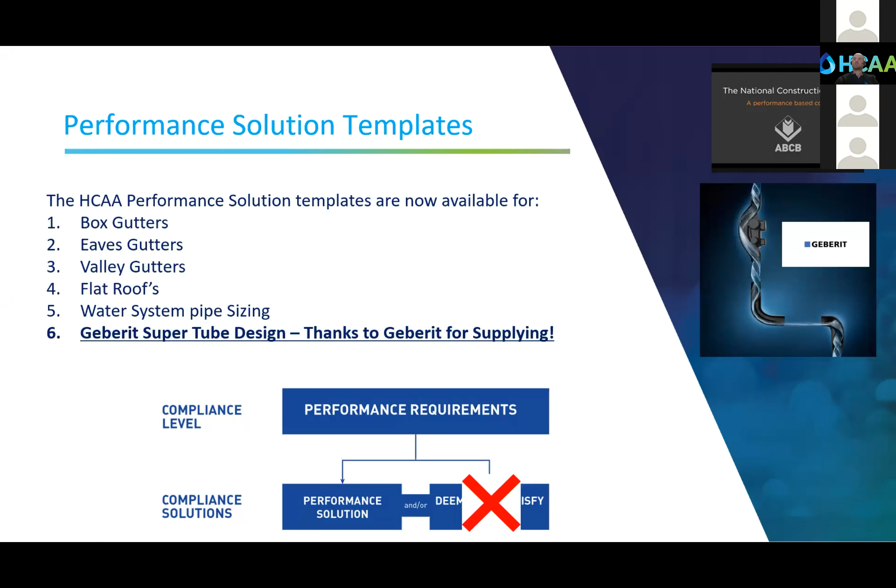The hydraulic diploma is starting online this month, or supposed to. Because of COVID there's possible delays, but Rod Ware will update us all a bit more on that.

I was going to say, can I jump in and add something to that? Do you want to do it now or later with the cadet stuff? No, you can do it quickly now.

I've literally just got off the phone with TAFE about half an hour ago. It's a bit of a moving goalpost, this one. What's happened is the diploma itself won't be starting this semester. TAFE have been trying very hard to get that happening, but the majority of people who've shown interest in doing the diploma aren't actually qualified, so they need to complete a couple of units to be able to enrol.

So TAFE are going to enrol everybody in the design, or hydraulic design stream, Cert 4. Anyone who has done their operation stream after their trade will get credits for the subjects they've done, and they'll likely only have probably 2 or 3 units to go. In term 3 the plan is to get all those people sorted out, and then by term 4 this year the diploma subjects will kick off.

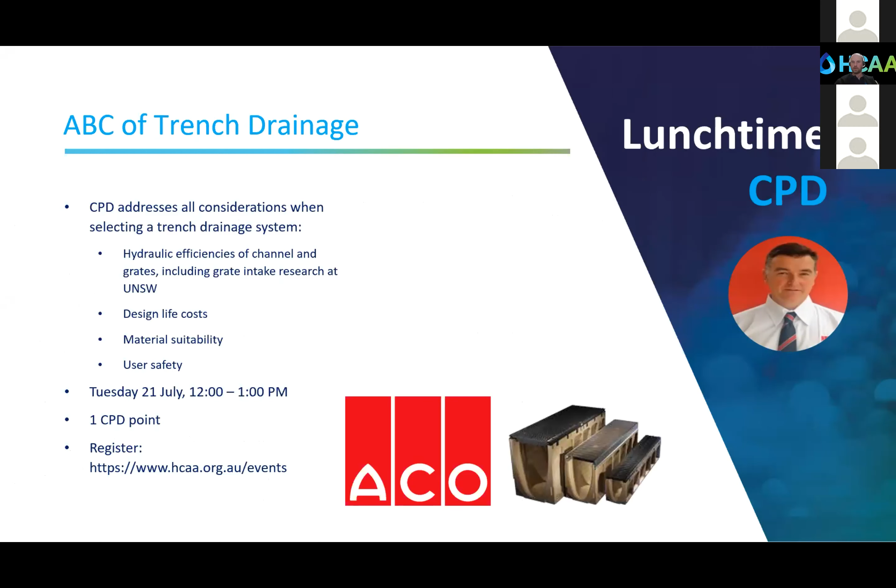Okay, so this is a new document that came out last week. We did send an email out, but it's a discussion paper, it's not set in stone. I don't think, if this does happen, that... this is at a national level, they've got to deal with all of the states. I think this has been discussed a few times over the last 20 years, but I do think they've got much more chance of getting it through now than they have previously.

But the main thing for us in our hydraulic world is the proposal states there's 3 levels of qualified individuals within hydraulics. Degree qualified, they're saying, if you read the paperwork that we sent through, a degree qualified civil engineer - they don't talk about any other disciplines, just civil engineering. And I think it might say, it does say in there, civil, hydraulic or water services, which they don't exist anyway.

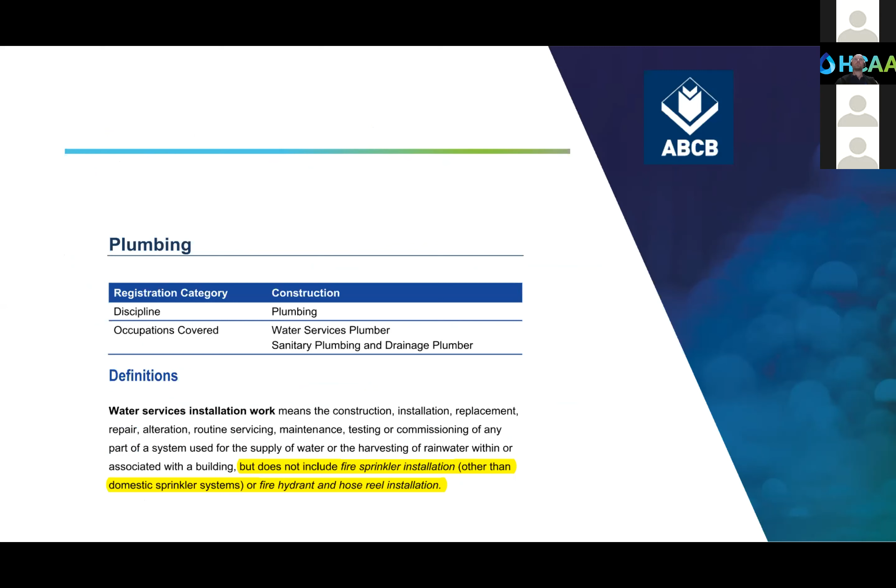There's one more screenshot here. This is just for those of you who have friends that are plumbers. I sent this to the master plumbers in Queensland, New South Wales, ACT, and Tasmania this morning as well. Basically, the document proposes that plumbers cannot install hydrants and hose reels. You can see at the bottom of the page there, which I believe in the majority of states around Australia, plumbers do install hydrants and hose reels. So that's some feedback. I think the master plumbers should get behind this as well.

I can pause there if anyone wants to jump in and throw any questions in or suggestions now. We can have a quick 2 or 3 minute chat around this, or otherwise I'll move to the next slide.

Nothing? Okay. Nick wanted to ask - Leon from Master Plumbers wants to ask a question. Is that going to get attended to later, or no, he can. Yeah, go ahead, Leon can ask a question. You there? I can't hear you. Oh yeah, oh, we go. Got you. Hey, Leon. Hey mate.

Just a quick question - does the BPB accreditation, is that the equivalent of a degree in terms of? Yes, exactly right. With the BPB, which I'm going to get to shortly, they've been dissolved, and as of the 1st of July they're now Fair Trading. So the same group that registers builders, plumbers and electricians are now registering engineers as well, or engineers and consultants. But yeah, you're correct. So to be qualified under the New South Wales scheme, you have to have a diploma as your minimum qualification.

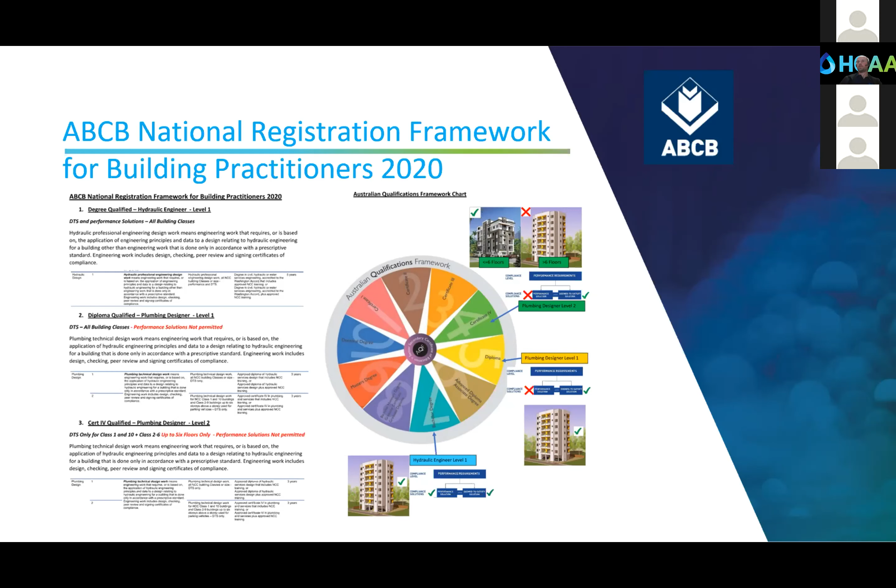Okay, so next was our warning, I mean there could be people from Perth practicing in New South Wales as well, but this is all these changes in New South Wales law. A few of the guys from Adelaide dialed into the committee meeting last week, so I apologise if I bore you with this again. So fire practitioners in New South Wales, as of the 1st of July 2020, practitioners must be accredited.

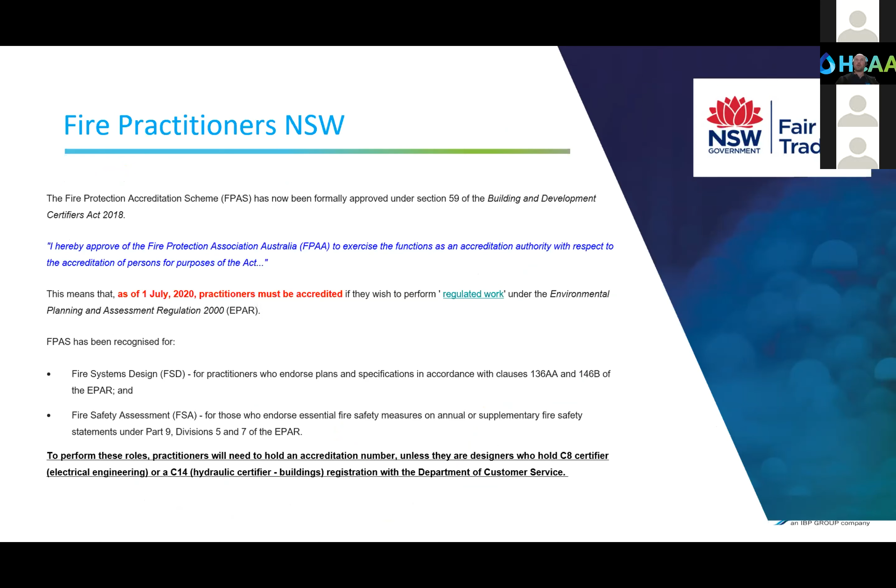So you can no longer design wet or dry fire systems in New South Wales without being appropriately accredited. How do you get accredited? I'll get to that shortly.

So on this particular slide here, maybe I'll look down here, so I'm looking at you all. The Building Professionals Board have now been disbanded, and they are now Fair Trading. What we were referring to as a C14 hydraulic certifier has now just been called a certifier hydraulic building.

They're actually all the same staff. They're in the same building in Parramatta. They're just all wearing different shirts now. So not much has changed other than the name in reality.

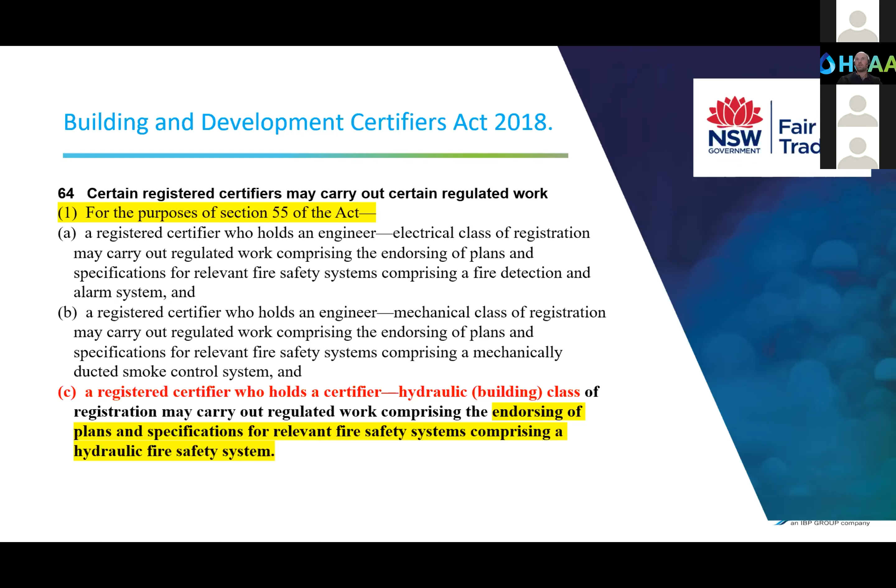So this is part of the Act. There's a few different acts, which I'll get to in a second, but under Section 55 of the Act, a registered certifier who holds a certifier hydraulic building class of registration may carry out regulated work comprising the endorsing of plans and specifications. So how that works is over here.

You can see there's the Environmental Planning and Assessment Regulation 2000. That calls up this legislation in regard to fire practitioners. The word competent fire safety practitioner has been used for about 4 years, but that's now being renamed to a fire practitioner. So again, that language will still hang around for a while, but that's the new wording.

You do a short course, you do an assessment, you provide your insurance, and that current renewal is $1,750 a year to renew your accreditation with the FPAA. With the New South Wales government or Fair Trading, you must have a diploma as a minimum, you must have 3 years experience, and you have to do a 4-day certification short course with the University of Technology in Sydney. They're the only uni that run the course.

That course is $3,000. You have to do 3 assignments and sit a test - it's kind of like going back to school again. Then the annual renewal with the government is $750 a year, and you carry 10 years professional indemnity for design. So if you change companies or the company you work for goes bust, you have to carry PI for 10 years for any jobs you signed off on as a hydraulic certifier. It's pretty scary stuff.

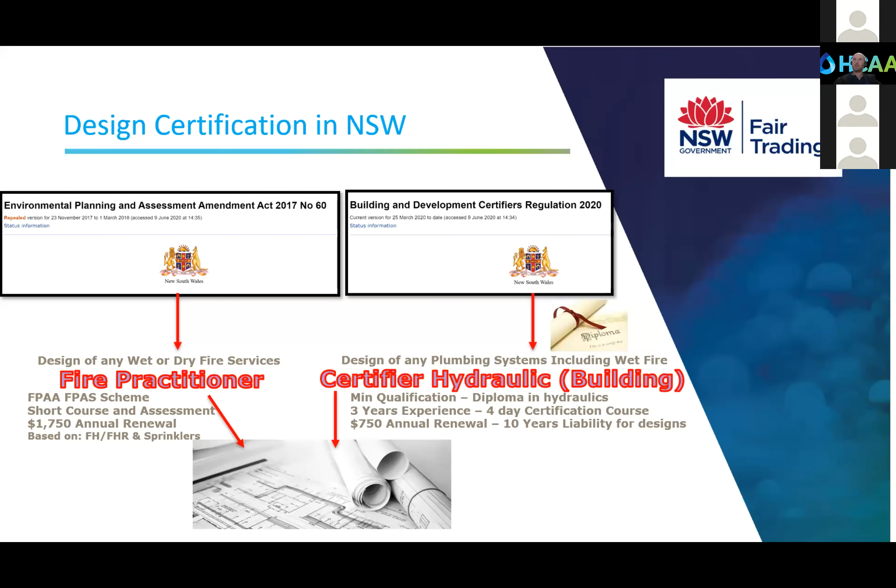This is how it works: most of our members are going to be accredited over here under Fair Trading, and being accredited here allows you to sign off as a fire practitioner. But some of our members will be accredited under FPAS - that's their little logo for FPAS. That's how our members become fire practitioners to do hydrant or sprinkler design in New South Wales. Some of our members do dry fire designs as well.

The only way to be accredited for dry fire - smoke detectors - is to be a degree-qualified electrical engineer. So unlike the hydraulic guys, anyone who's done a fire diploma instead of a degree cannot become registered to sign off on dry fire under this building and development certifiers regulation. What really needs to happen is the government needs to be lobbied to provide a separate pathway for guys with a fire diploma. At the moment, if you've got a fire diploma, the only pathway to sign off on dry fire is under FPAS. I apologize if I'm boring people that aren't practicing in New South Wales, but there are some pretty significant changes.

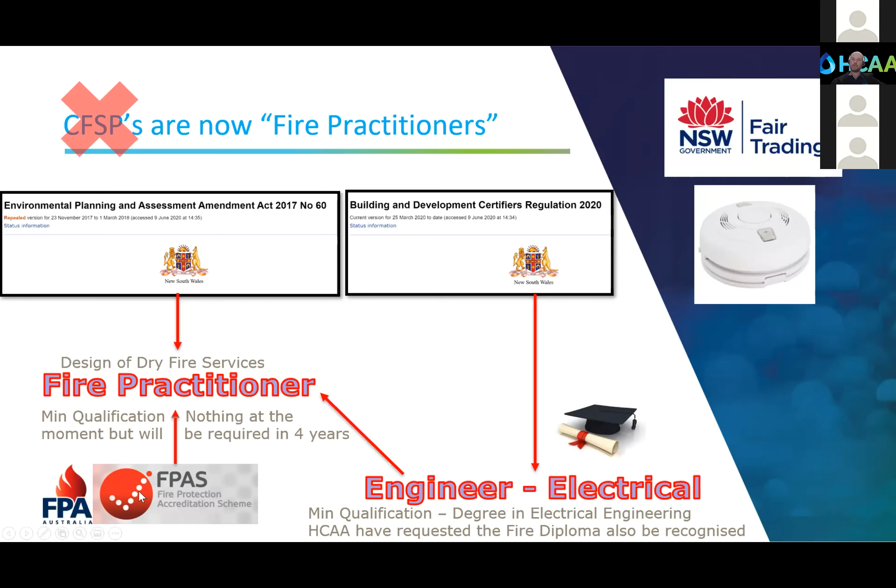Within the company I work for, ACOR, we've got 400 staff Australia-wide, and we currently have no one who can sign off - I'll have the slide coming out later. We've got no one that can sign off because, although I am accredited under the government scheme, our insurance policy was rejected - our insurer is excluding non-compliant products. They're very strict about insurance policies, and we cannot find an insurer at the moment willing to give us a policy that meets the New South Wales government's requirements. So we're currently in negotiations with a few fire contractors who've been accredited under FPAS to sign off on our designs. That's how mad the legislation in New South Wales has gone.

This one was a bit of a warning. This could be happening in other states, but I've only been advised of this happening in New South Wales. Fire and Rescue New South Wales - this was a job that I worked on.

They did an inspection. We showed the hydrant in the corner here, but the plumbers installed it within probably 300 mil of the door. The fire brigade said that because the hose connection is within 1 meter of the door, that's a non-compliant installation, and they requested the plumber move it back into the corner, which the plumber has now done, and they've ticked off on it. You can see in the corner you would get the meter's clearance. But if you read the black and white interpretation in AS 2419, it doesn't call up a meter's clearance to a door. So it's one of those gray areas within a standard - just be aware that this is how the fire brigade are interpreting it.

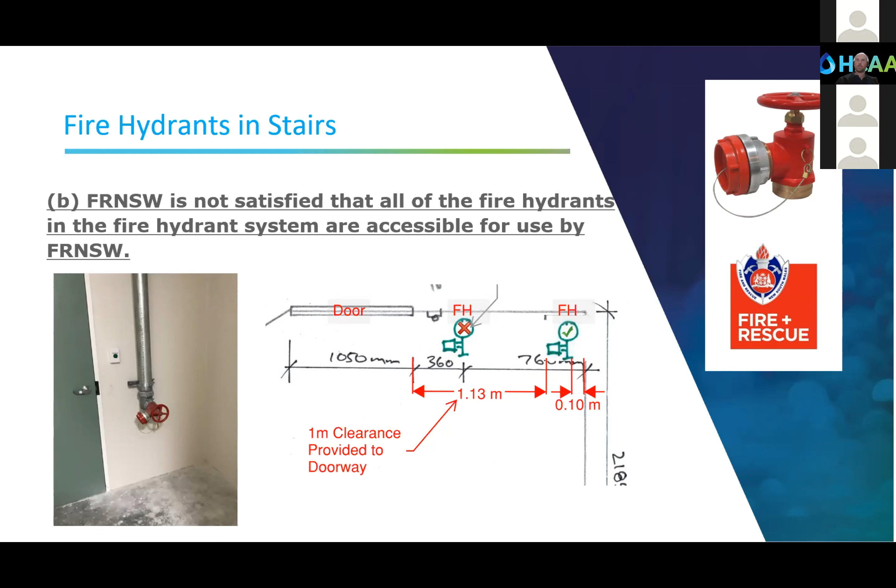When they turn up at the end of the job, they do have the authority to stop - in New South Wales at least - the authority to stop the job from proceeding. So that's what the AS 2419 shows: a meter's clearance to a doorway.

Yeah, but you can interpret it as you like. And then this was another job, which is a contradictory assessment.

One of our members defected the plumber because the hydrant was facing down the stair instead of towards the door. The accredited certifier on the job, the A1 building certifier, which in New South Wales signs off on the whole building, backed the plumber on having that facing down the stair, which is a slightly separate issue to the one I just showed you before.

But again, there's differences of opinion here that the code doesn't clearly spell out. To me, having it face towards the door would make more sense. There's more than a meter's clearance in that installation, but again, just some different opinions out there in the industry.

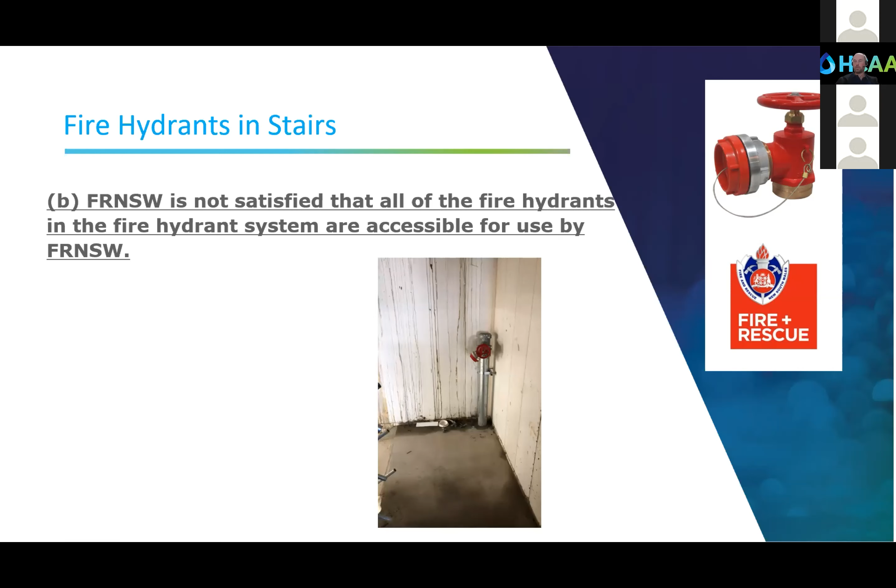I don't know if this email has actually been sent yet. I did do a draft of it the other day, but all 5 versions of AS 3500, or AS/NZS 3500, have been sent out in draft format for comment. All comments can be submitted to inquiries at hcaa.org.au.

The documents, as I'm aware, what Standards have done this time to help people out is they've given 2 versions: a clean cut version, and then a version which has edits in it so you can clearly see what has changed. I'm not aware of anything particularly controversial in there, but if you guys have any comments, send them through to us and we can present them to Standards Australia.

The latest gas code should be coming out for comment in the next month or so, so keep your eyes out for that. There are some relatively big changes in there that I'm hoping to present maybe as a separate meeting to members to run through those changes.

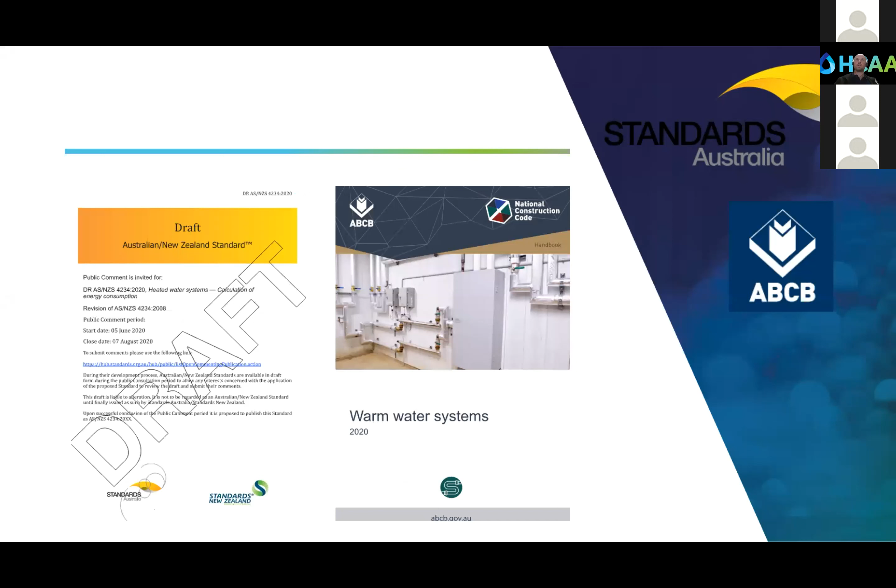There's a couple of other draft documents coming out at the moment. We've got one here on heated water systems, calculation of energy consumption, and then the ABCB have produced one on warm water systems, again both coming out in draft format. If anyone's keen to have a look at those documents, let us know. It's still yet to be seen how those documents are going to be referenced or used, but it's just a bit of a heads up that they're coming.

So this was the insurance policy bit that I told you about. Again, if you want to register yourselves in New South Wales - non-compliant, non-conforming, I won't run through all that - but what I was told is a non-compliant product is what our insurer is currently excluding. An example I was given was a Colorbond roof sheet being used on a wall: if it's designed to be used as a roof sheet and installed horizontally, it can't be installed vertically. I don't know if that's true or not, but what the insurer is saying is they won't insure you for a product that hasn't been installed as per its design intent.

Where the New South Wales government is saying, well, the only thing they'll accept excluding at the moment is cladding, which is obviously in relation to the fire issues that have been happening with non-compliant cladding.

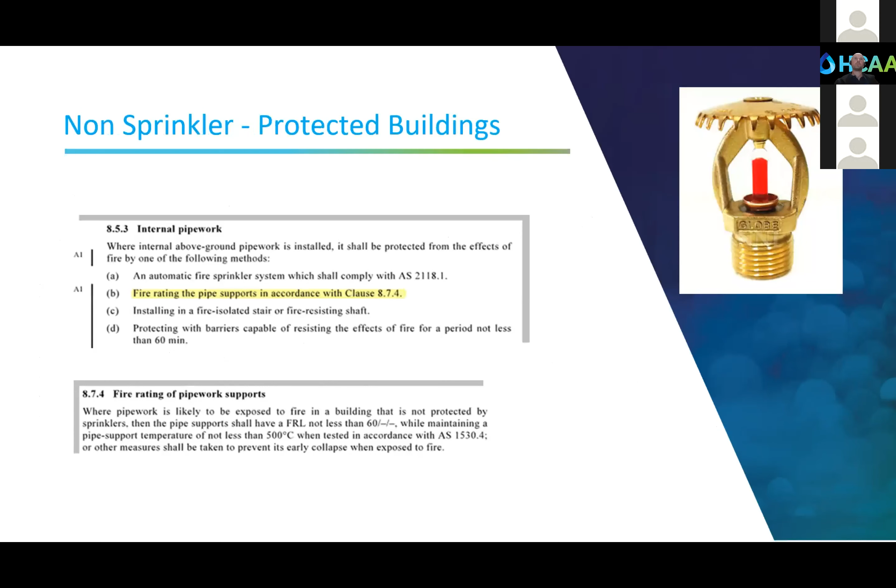Non-sprinkler protected buildings - I left this in from the last meeting, but what I was going to say is, if you are going to use this bracket from Protector Pipe, you will need to consult your fire engineer on your job as well, because I don't know that it's strictly in compliance with 2419. Someone just raised this after the last meeting. Your fire engineer can easily reference that as a solution instead of having to use the vermiculite spray in option 2 there over the brackets, which also has to be signed off at the end of the job anyway.

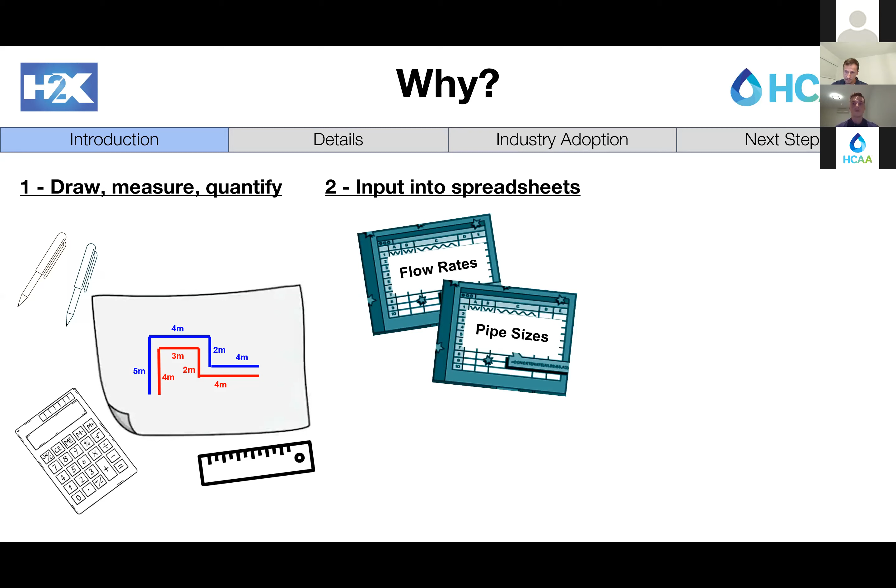Next, we'd manually transfer the information into a spreadsheet, and it's commonly not just one spreadsheet. We'd typically have a spreadsheet for flow rates, pipe sizes, pressure loss, and hot water return, and potentially some others too. Then finally, we need to transfer the results manually back onto the design.

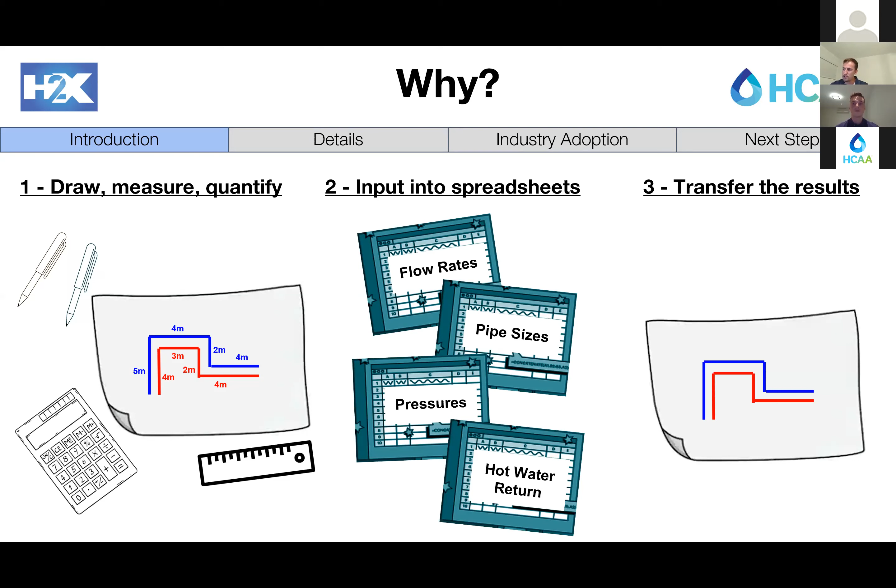So the most obvious observation with that process is it's time consuming. It's also very tedious, and not only that, there's a significant risk of human error, as there's a lot of information being manually transferred to and from spreadsheets. It's also very difficult to review, with the calculation results being in a separate location to the drawing the results are shown on. And inevitably, the architect's going to redesign the building, which can be problematic.

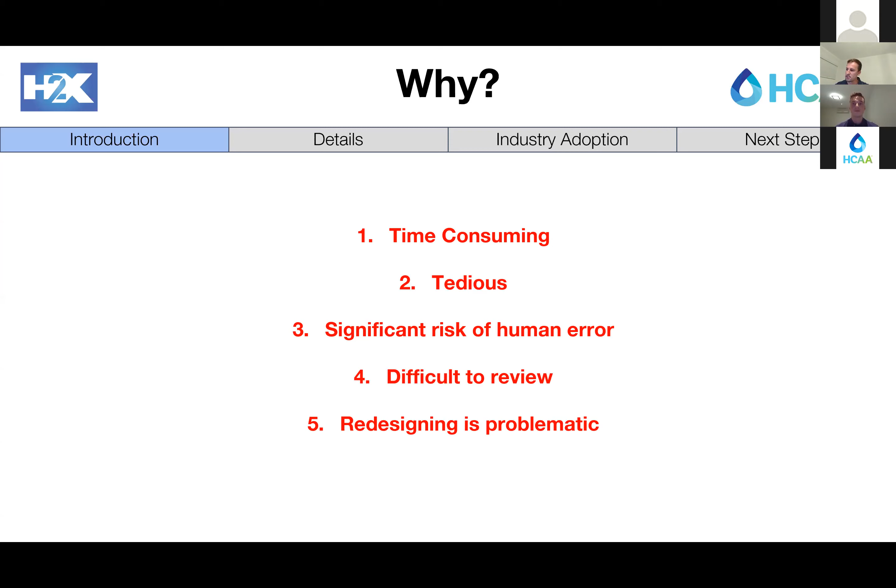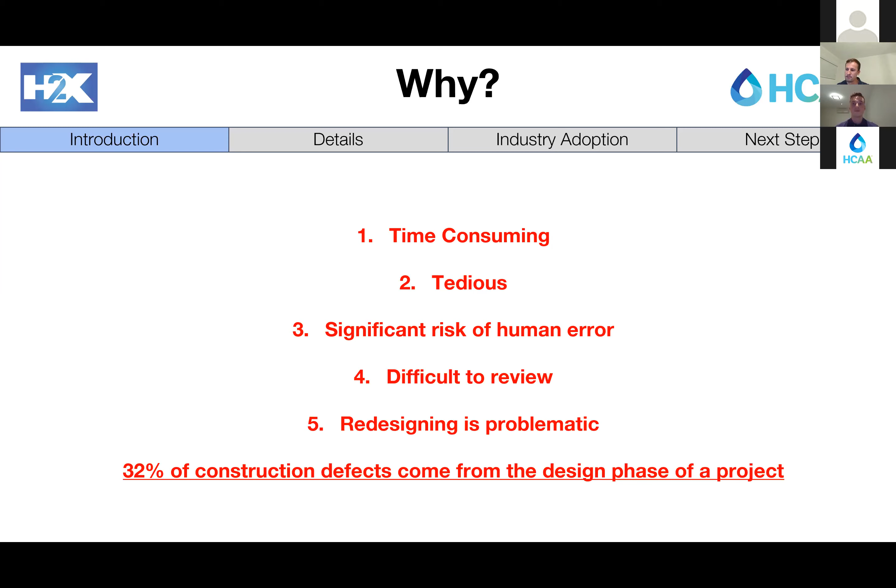It wastes a lot of our time. I think we're all familiar with it. Usually results in us needing to just redo the calculations and start from the beginning. And quite a surprising stat is that almost a third of construction defects come from the design phase of a project. Upon reading more about it, it's pretty much those 5 points listed above that contribute to these defects. It's not thought to be a lack of competence by the engineer, but just more of the processes.

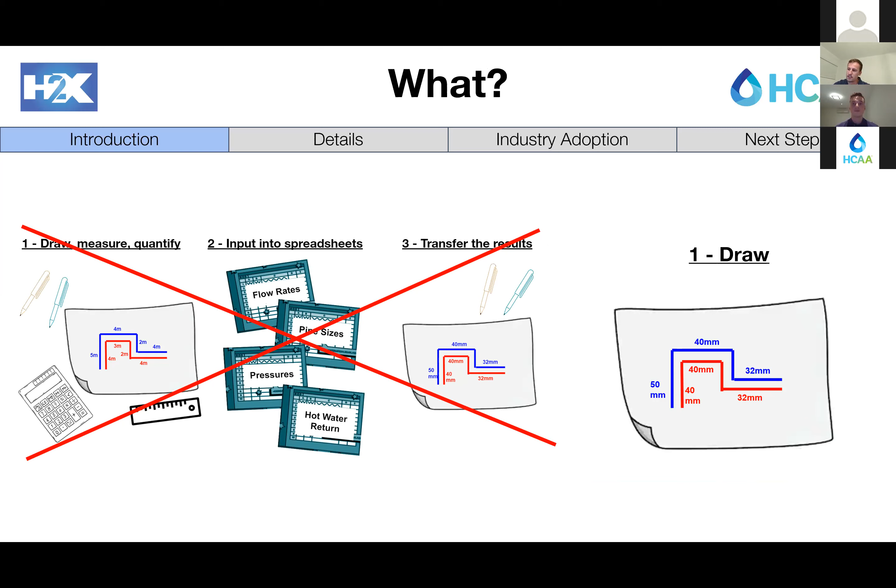So what does H2X do about this? Put simply, it replaces the traditional design and calculation process we just spoke through with just one simple step. You draw out the system and calculations are automated, meaning the results are provided instantly to your design.

The last piece of the introduction is, how does it do that? The answer is parameters and properties. For example, when you draw a pipe using Bluebeam, you'd be familiar with selecting parameters such as the thickness and color of the line or pipe. Whereas in H2X, it's a bit more technical, so you'd select parameters such as the maximum velocity and the material. Then when you go to connect to a fixture, that has properties like loading units, minimum pressures, and maximum pressures.

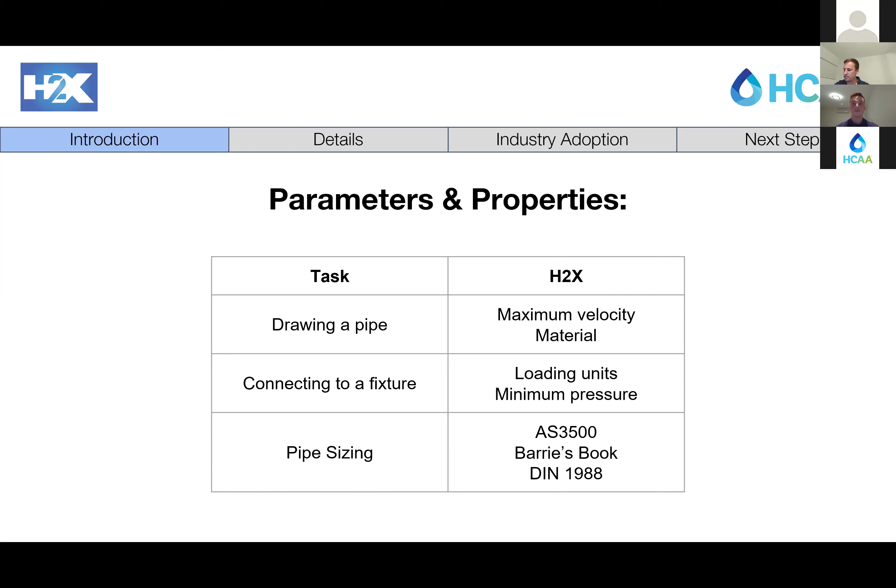And then when it comes to flow rate and pipe sizing, again there's just another parameter, whether it's the Australian standards, Barrie's book, the DIN, or one of the other international standards we have. I'll just go through the process diagrammatically.

It starts with the drawing being to scale, so when the user draws a pipe, the length is automatically measured. That then means when the fixtures are connected to the pipes, the flow rates are updated instantly. We'll see it again here as we connect another fixture.

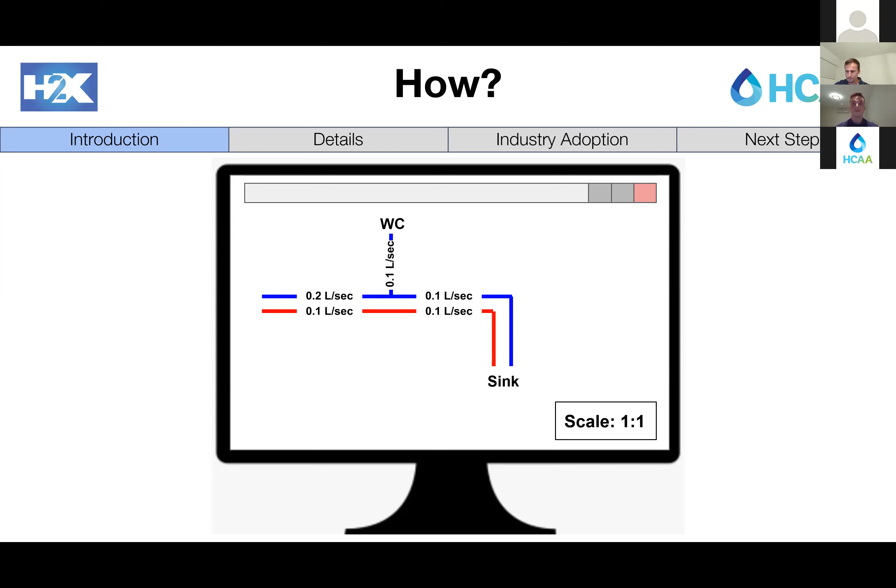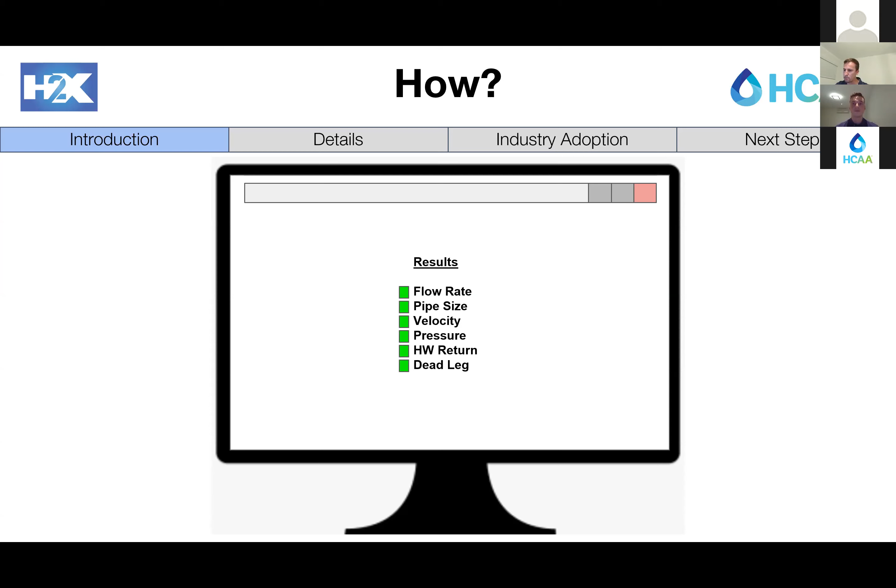I think the beauty of it is that once we know what the flow rate is, it allows us to size the pipes, which is based on a maximum velocity. And once we know the velocity, we can then calculate the pressure loss. We can also calculate hot water return systems by just drawing lines, and once we have a circulating system, we can calculate dead legs too.

So that's an introduction to the software. Hopefully it gives you a good understanding of why and how it works.

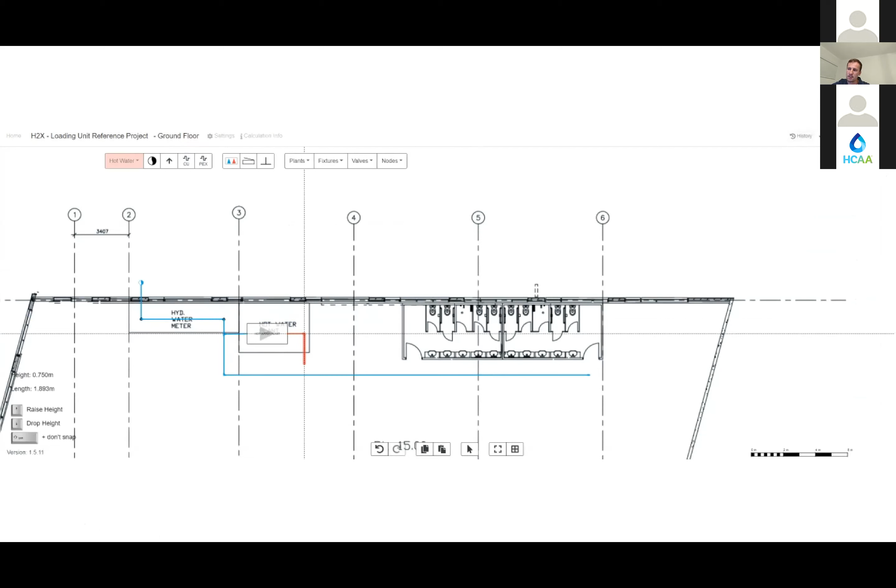You probably didn't see it because it was pretty fast, but there's also an opportunity to add booster pumps, storage tanks, and you can even create your own custom plant. So if you've got any filters or anything unusual, you can create your own plant and add pressure loss and things. What we're seeing here is simply how to do a hot water return system.

So all you have to do is draw some lines, connect it back to the hot water plant, add a balancing valve, and based on—I might just pause it because I'm falling behind—based on water temperatures, air temperatures, insulation thickness, and pipe size, all the calculations in the hot water circulating system will be done. We'll see the results shortly.

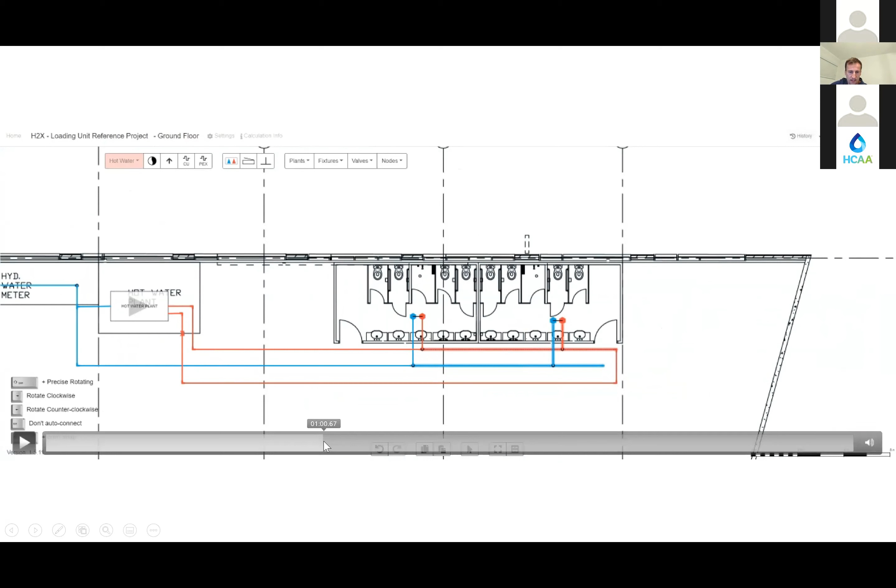The last piece of the puzzle, I'll just point out as well—I think we're only a minute in, and it is a small building, but shortly you'll see how quickly the results are provided. So we've used nodes in this example, which we've put loading units against, which you'll just see here.

And we just flick to the results at the top. Just looking at all the filters on the right, there's an insane amount of information that comes out of it. We've only got a few boxes ticked because we don't need to overload it, but you can see here the circulating pump duty, return heat loss and pressure drops calculated, pipe sizes, velocities, flow rates, pressures at the nodes. So that is how quick and easily you can design.

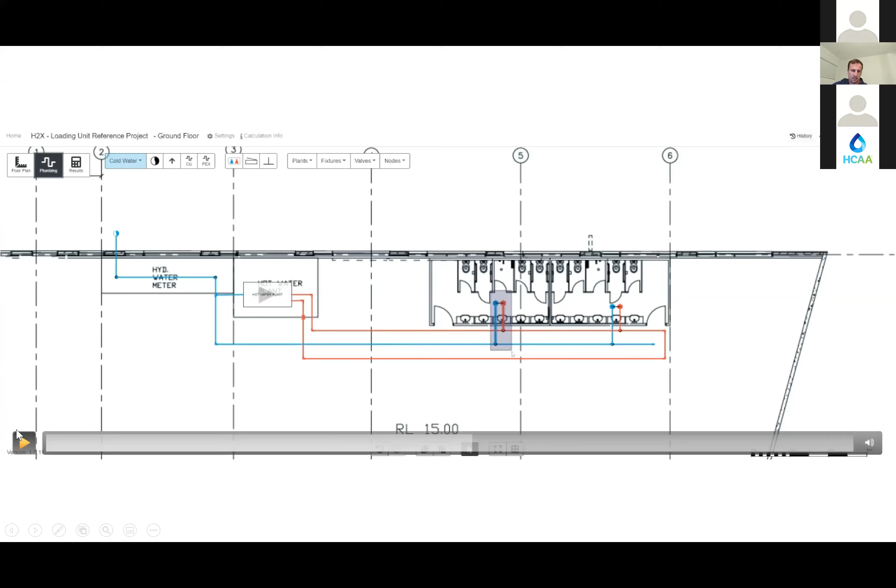And what we'll show now by just coming back into this plumbing workspace is how we can take the design to an extra level of detail. So maybe doing a concept design, you can go with the nodes, but maybe you're doing detailed design or a little bit, maybe construction drawings.

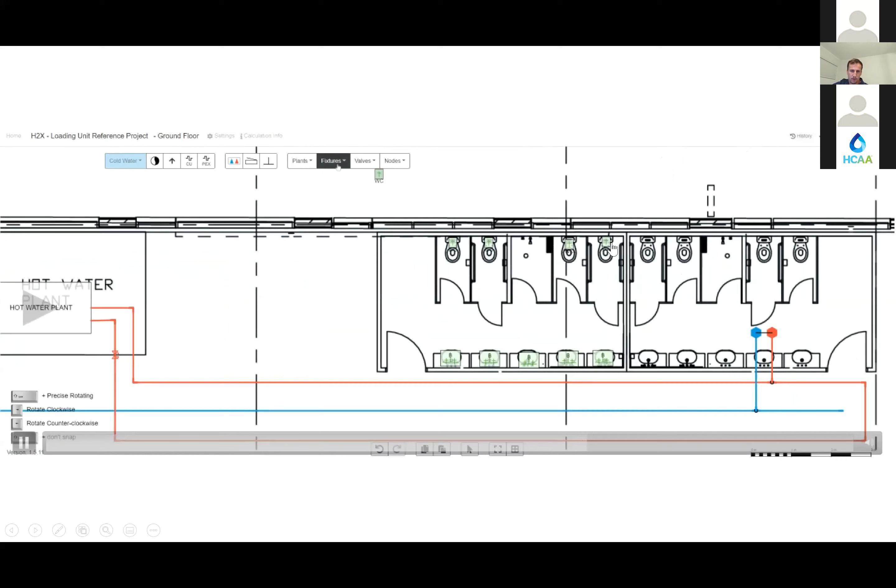So to take it to the next level, there's two things you do, and that is stamp the fixtures. There was only a few shown there, but again, pretty much every fixture is in the software. Literally just stamp it where they need to be over the architectural design. And as we'll see now, we've got an RPZ, TMV, or a tempering valve - you can pick what you want. That snaps to the nearest pipes, and by highlighting fixtures and the valves, auto connecting, the roughing is automatically done.

So we've got an algorithm that looks where the walls are. As you see in this example, it knows based on the fixture orientation that the pipe can run in the wall, but understands that this is, it could run around, but it's a pretty far distance. So it comes up into the ceiling, drops back down and connects to the shower.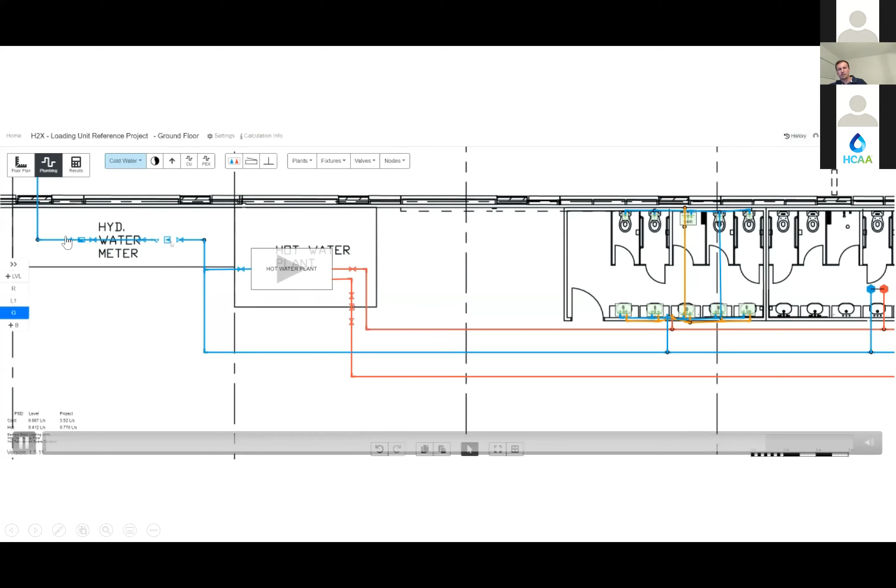And by stamping the fixtures, we'll see in a second, we get more accurate results like pressures, dead legs. And what we're just showing here with the valves is you can add ball valves, water meters, RPZs, pretty much everything again, strainers - everything's got a KV value. So the more you stamp these, the more pressure loss there'll be in your system, in addition to all the bends and T's, which are automatically recognized.

And we can just see that all the pressure drop through the valves, and we can see here we've got an issue - because the pressure at the fixture is below 200 kPa, very clear to see that there's a problem. We don't fix it in this example, but we could go back in, add a booster pump, and put pressure reduction valves, whatever we need to do. So yeah, just in that video - 3 minutes long, not even - we're able to design this, which I know is small, but just gives a good example of the efficiencies.

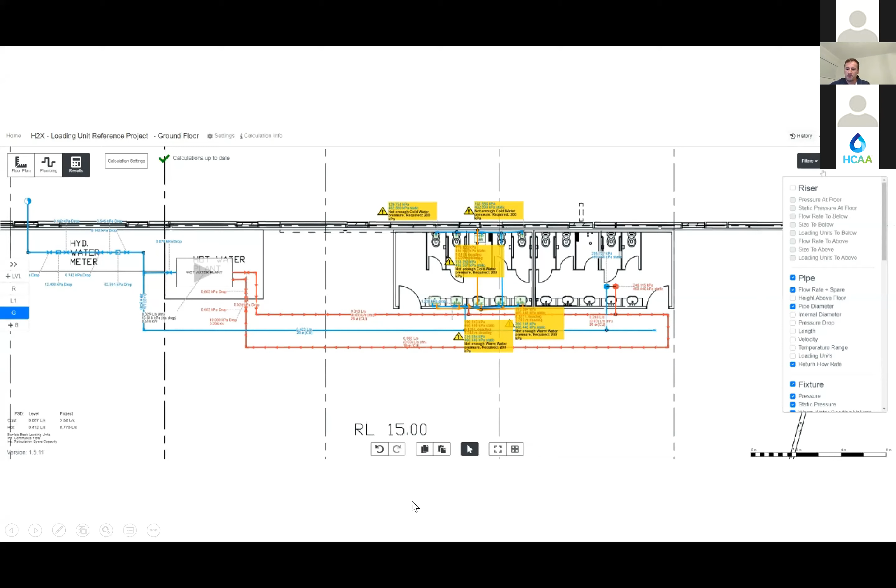Hey Johnny, can I jump in for 2 seconds? Yeah, sure. Just because I have used it myself, but I don't think you explained just how you actually are doing this.

So it's the fact that it's a PDF in a browser like Google Chrome. So you load the PDF into the browser, and then you scale the PDF. So when Johnny was saying earlier that it calculates the pipe size, that's based on you inputting the scale of your PDF and then drawing over the top of it through your web browser. Yeah, that's right. So when you draw your pipe, if it's 10 meters long, it recognizes that. So the pressure loss is calculated at that distance, and heat loss as well, calculated at that distance. Thanks for clarifying that, Nick.

And then also just this second video, I just wanted to tie it into some of the work that HCAA has been doing with Deakin University in relation to the peak flow rates, which Nick also just mentioned earlier on. So for those that weren't at the last presentation, Brendan presented on the data that HCAA has collected on buildings - it's been nearly a year now, I think just over a year, across New South Wales and Canberra. And the results show that, I think we all know, but the Australian standards are incredibly oversized. But like with the performance solution that's being provided, the German DIN standard is very accurate - I think it's like 27% of the Australian standards.

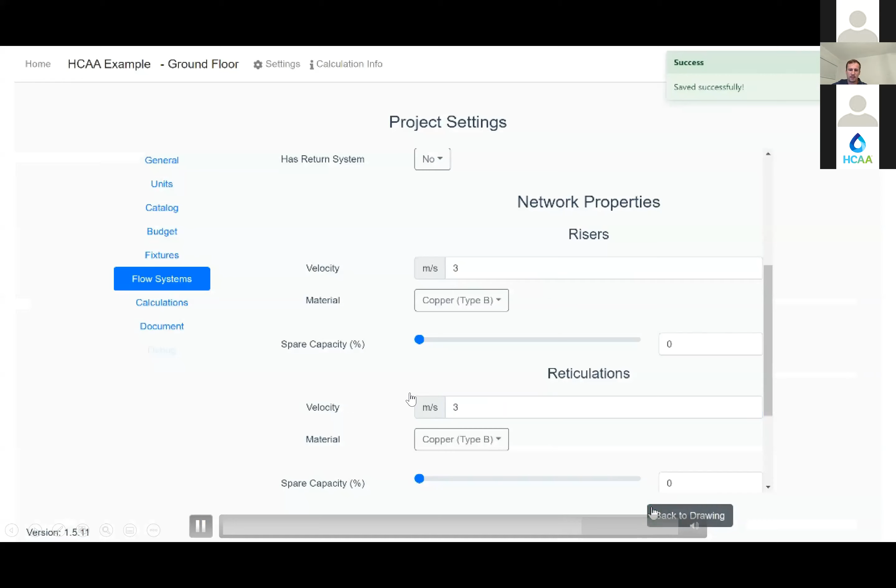And then there we go. It's actually a 40 mil supply to the building. Hot water stays the same because it's not edited, and we can see that the project cost comes down as well. So this would work well with the performance solutions that Nick was just talking about.

The template is pretty much ready to go. You just need to add calculations, which can be exported straight from the software, and just fill in generic information like company name.

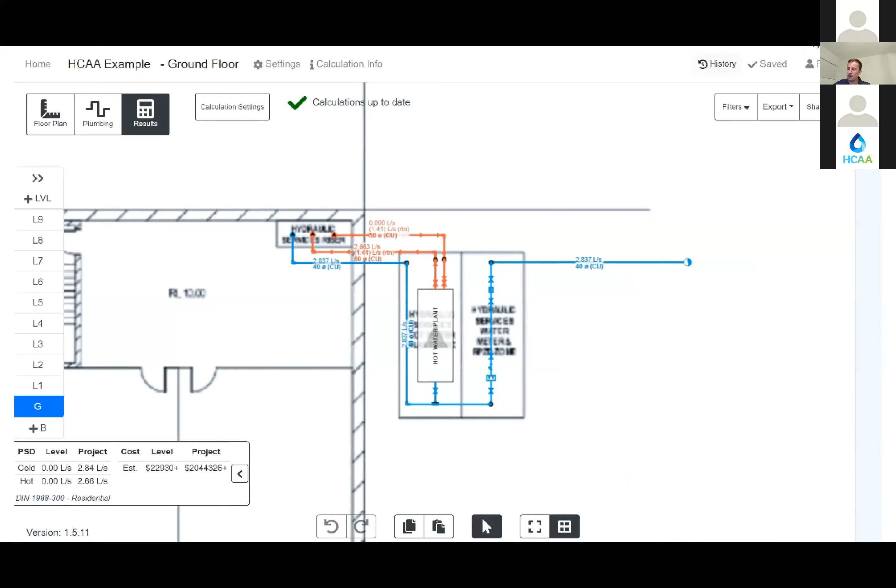And I suppose this is just a summary really. I suppose most projects end up over budget. We're asked by the client to do value engineering. And as we just saw, H2X lets you do this with ease.

So just looking at the 3 different options we went through, you could simply provide to your client, look, we can stick with the deemed to satisfy, relatively expensive, really high flow rates, really large pipes that are taking up space.

If you're feeling adventurous, we could go with the DIN, still compliant, just need a performance solution, brings the flow rates down drastically, brings the cost down, pipe sizes down as well.

And if you're feeling even more adventurous, you can also up it to 3 meters per second, which is still compliant. It's a bit unusual, but yeah, and you can instantly give them a dollar value saving as well.

And I suppose the opportunities are endless. I've kind of just selected a few different things, but you can change insulation thickness, pipe layouts, materials, different hot water system types. Yeah, you can really keep flicking your way through.

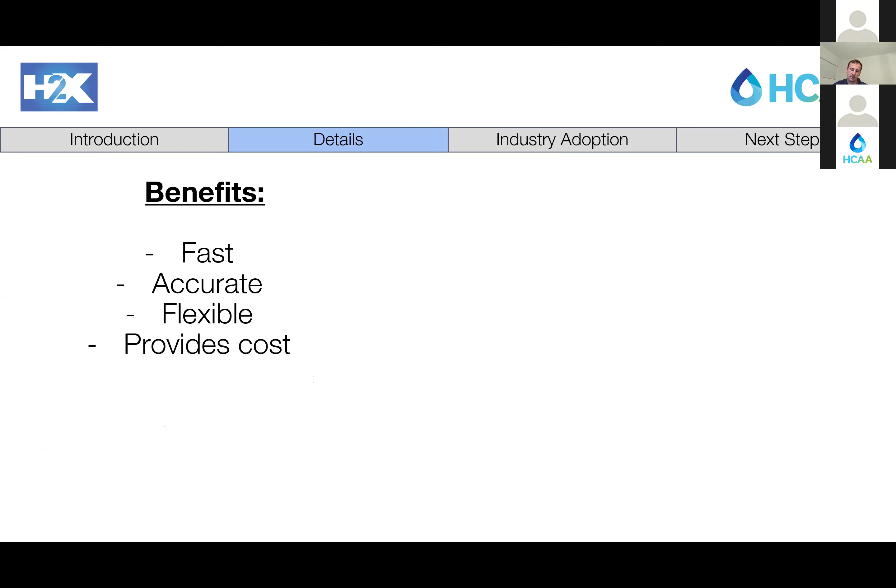I suppose just in the interest of time, we aren't able to go through all the benefits, but what we've seen there is it's fast, it's accurate, it's flexible, and it provides a cost as well.

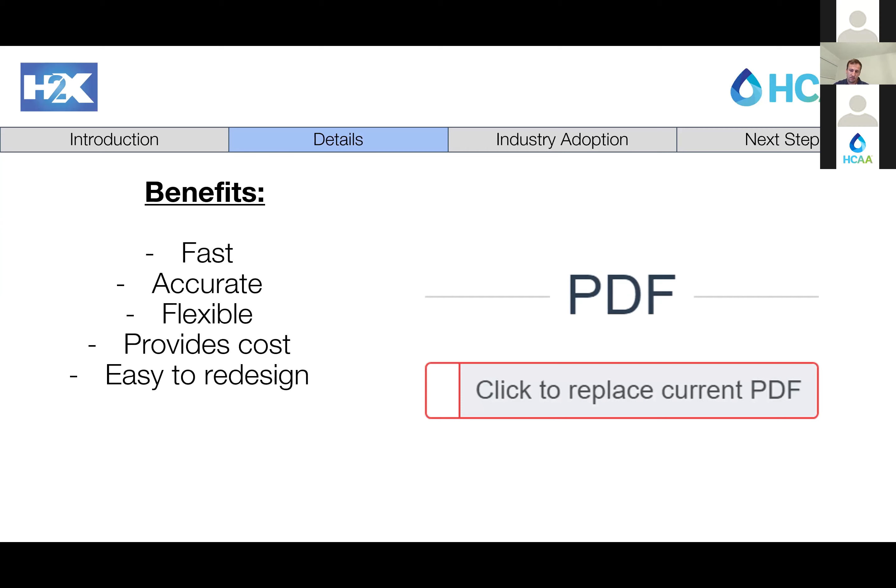It's also easy to redesign, so when you receive new architectural layouts, you simply just replace the PDF, insert the new one, and the updated background will appear with the current hydraulic layout, and then easily you can see where the changes are, so you can just drag components around, add new fixtures and pipes where required, and delete some as well if that's also required.

Also an opportunity to standardize outcomes from your office, something we didn't think of when we were developing the software, but it's a benefit that pretty much every company's mentioned to us, especially the larger companies.

So you can just select what results you want to export and append it to your design report or whatever you'd like to. You're also able to share a link, so you can share a read-only version of your project.

This is helpful if you want to send it to external project managers, maybe your peer review consultant, even plumbing contractors, especially now the cost is involved.

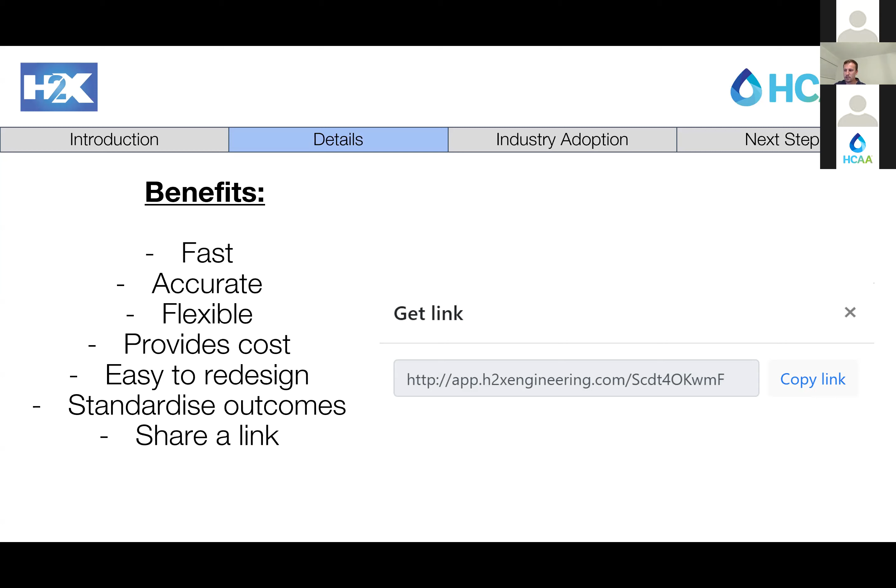And also you can share it internally, so you can send it to your manager for review. But a good feature is you can send it to your drafter as well. So a good benefit of sending it to your drafter is they have access to all the information they need without having to ask you those simple, annoying questions.

So when we give a drafter a markup, there's only so much information you can fit on a 1:100 PDF.

Whereas if you send them the link to H2X, it's got a similar approach to Google Maps, where the closer you zoom in, the more information will appear. When you zoom out, just the key information will appear.

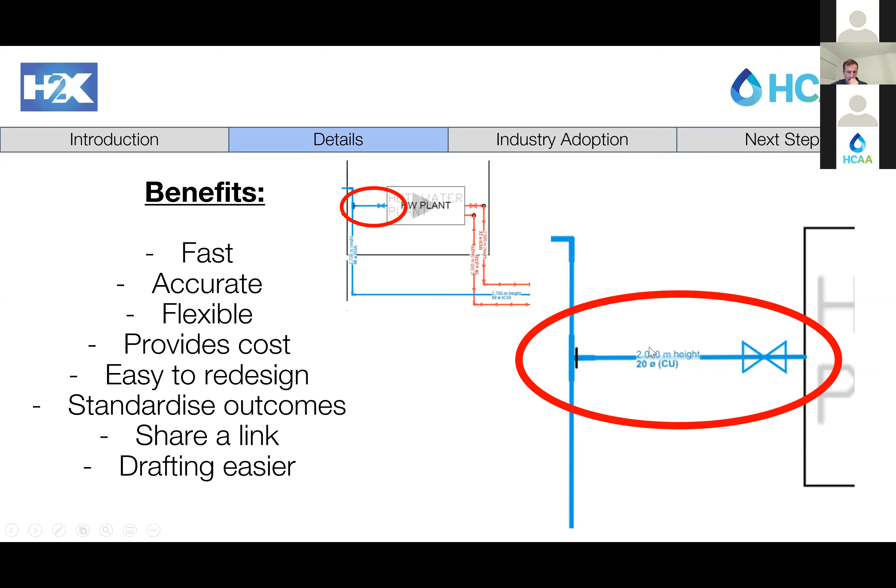So using the example on the screen, from a relatively zoomed out position, there's no information on the pipe that connects to the hot water plant. But if you're the drafter, you just zoom in, and not only do you see the pipe size, but you can also turn the result filter on, which shows the height above the floor. So if they're copying it in Revit, it's very helpful for them too.

The last point is that it's very easy to review. All the results are assigned specifically to the component, so there's no confusion trying to correlate between a result on a spreadsheet and the correct component on the drawing. In the example here, you can clearly see which pipes need to be what size, and if there's a pressure problem, like we've got in the example, cold water pressure required to be 200 and it's not, you can quickly see that drawings aren't correct to be sent out for tender or construction.

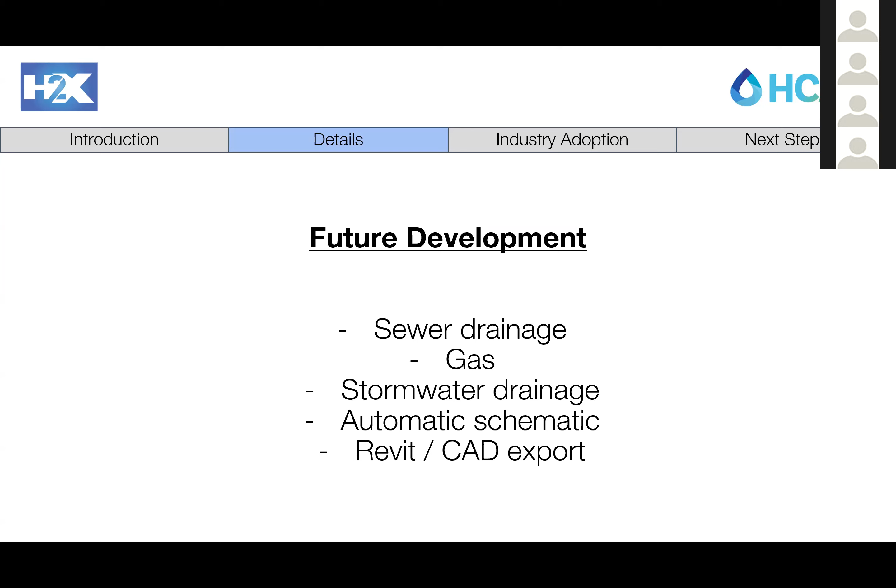I'm continuously improving the product, so we've made over 100 updates since January and we'll continue to do so. Next major items will be including sewer drainage, gas, and stormwater, so we want to be a central location for all design and calculations relating to hydraulics. Following that, we're looking to implement an automatic schematic, so whatever you draw in the floor plan view will be instantly replicated in schematic view. As soon as you make a change, like deleting a level or making a pipe bigger, it's instantly reflected in the schematic. And following that, we'll be looking to export into Revit and CAD.

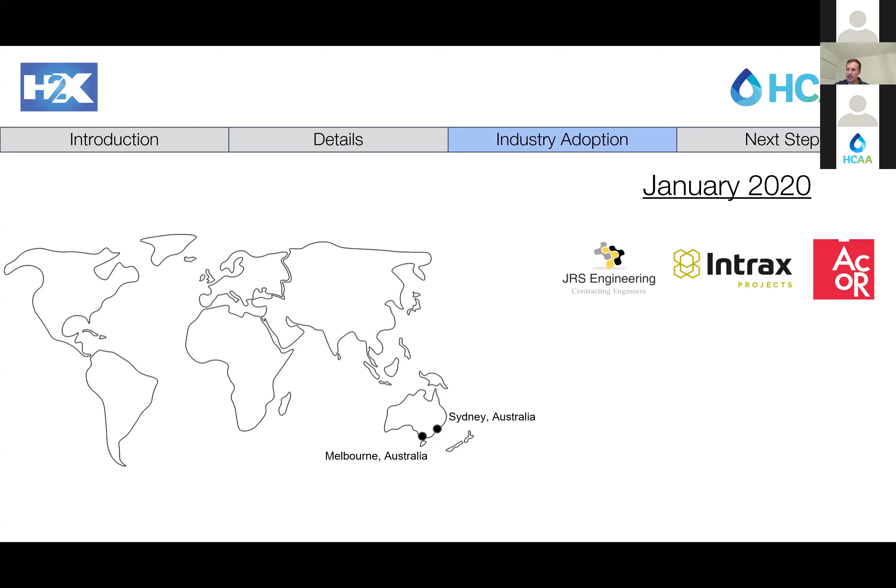In terms of industry adoption, if you're conscious of these inefficiencies, you're not alone. In January this year, we completed the beta phase with our early adopters, shown on the screen. I wanted to put them up there because they were really good with us in the beginning, putting up with some inefficiencies. But fast forward 6 months and we're solving the problem for companies around the world. There's been over 200 projects completed in the software, more than 50 organizations with over 80 users, and just recently, with the inclusion of British standards, it's allowed us to go across 7 countries.

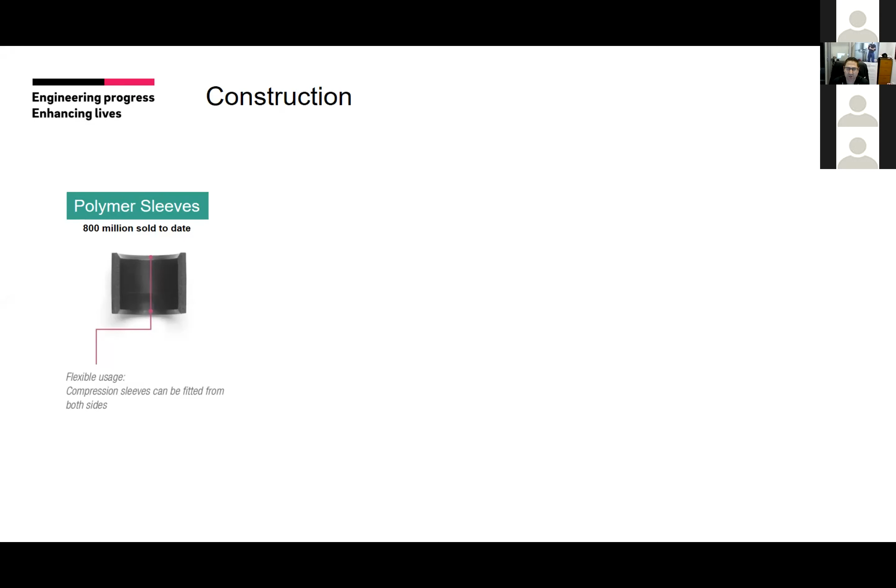The benefits of the polymer sleeve is it's reversible, so from both sides, it's flexible, and the tooling is a lot easier to use on site for the contractors.

The polymer fittings, our claim to fame there is 0.0001% manufacturing defect. Because we control the manufacturing process, we test the raw material before it gets entered into the machines, and we also do some testing on the product before it even leaves the manufacturing plant.

Our brass fittings - Rehau's specialty is our brass for our standard RAUTITAN system. The Australian standards minimum requirement is 100 microns of dezincification depth, whereas Rehau standard is actually at 50. So we definitely take it seriously when we look at dezincification in brass fittings.

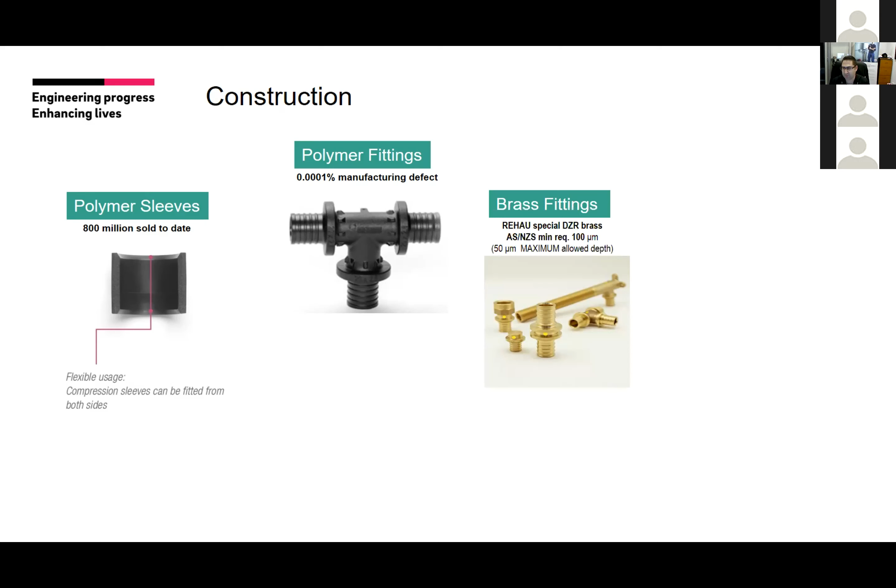With the pipe, 1 billion metres of pipe have been manufactured from Rehau - that's 7.5 times from Earth to Moon and back. So there is a lot of research into the pipe. We continue to manufacture the same pipe, the same quality, the same standard, using the same raw materials. We always keep on top of how we manufacture our pipe as well.

And national support - we are based in Australia, and we've got a sales and technical team in each state. So working with Jonathan with H2X, we're able to give him the data that's required for programs like that as well, and he's got the backup locally that he can rely on, as well as obviously the consultants and contractors.

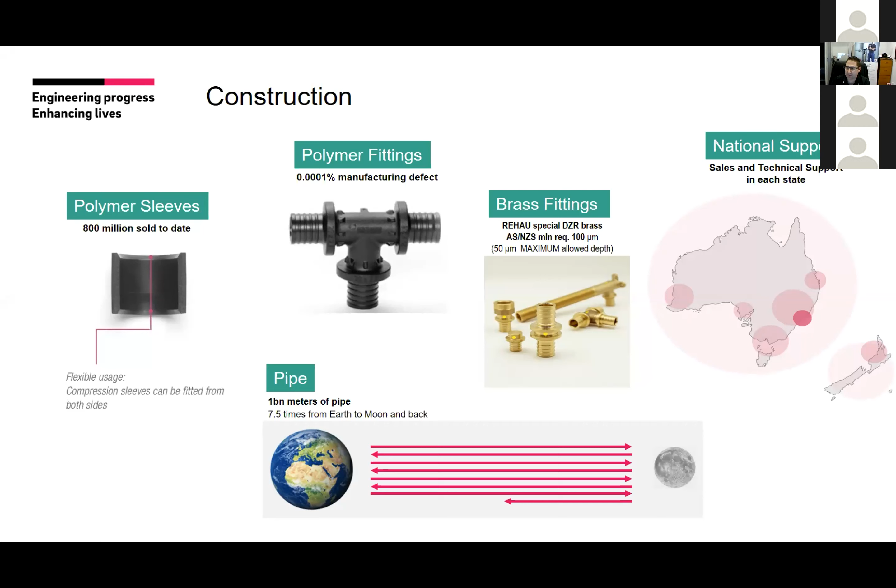So that's obviously what we've been going through for many years, and now our next trust factor as well.

With Rio, we have gone a step past that as well, which I'll go through in a second.

Just to go through some media coverage - I can't remember the manufacturer, but they did a presentation at the HCAA just before COVID hit, and went through their lead-free tapware solutions and some of this documentation as well.

But the plumbing connection - the Perth Children's Hospital, the amount of media going behind these sort of projects. With enHealth, there's a guideline on lead in drinking water from some plumbing products.

enHealth recommends that every effort should be made to reduce exposure to lead in the environment. Once again, these things - that was back in July 2018 - Rehau is slowly getting there, we've got the systems available in Europe and we are bringing them to Australia as well.

And then the VSBA Building Authority handbook with drinking fountains - they need to be made from lead-free or lead-safe products. So it's no good having a lead-safe or lead-free tap, you need to worry about the pipework and the fittings that's obviously feeding that tapware as well. And that's where a company like Rehau comes in.

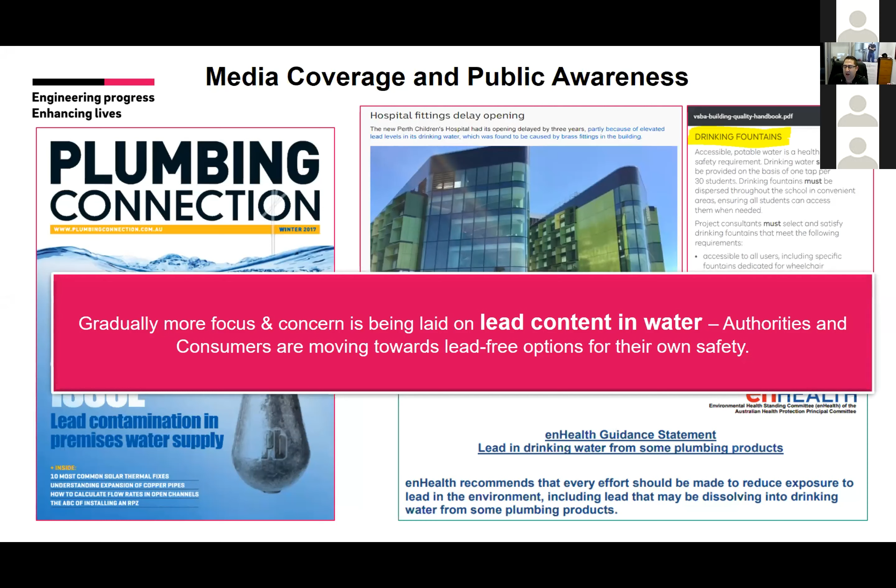That's a key for us - we're getting contacted on a daily, weekly basis, asking more and more about when Rehau is bringing out a product, and we're basically there now, which we'll go through.

So an ABCB report on lead in plumbing products and materials states the performance requirements for maximum allowable lead concentrations for metal and metal alloy components in contact with hot water is a maximum of 4.5%, with lead solder limited to 0.1%. The recommendation is that only low lead, or preferably lead-free, plumbing components should be used - a maximum of 0.25% lead content as the preferred lead-free definition, a statement from PPI in 2018.

Considering that, there's a need for formal guidelines related to flushing water service lines where there has been low water demand or standing water for extended periods, such as schools following vacation periods. Look at hotels currently going through high vacancy rates - flushing these services can be detrimental to the workload of the hotels or schools long term. We'll branch more into that in the Legionella part of our presentation.

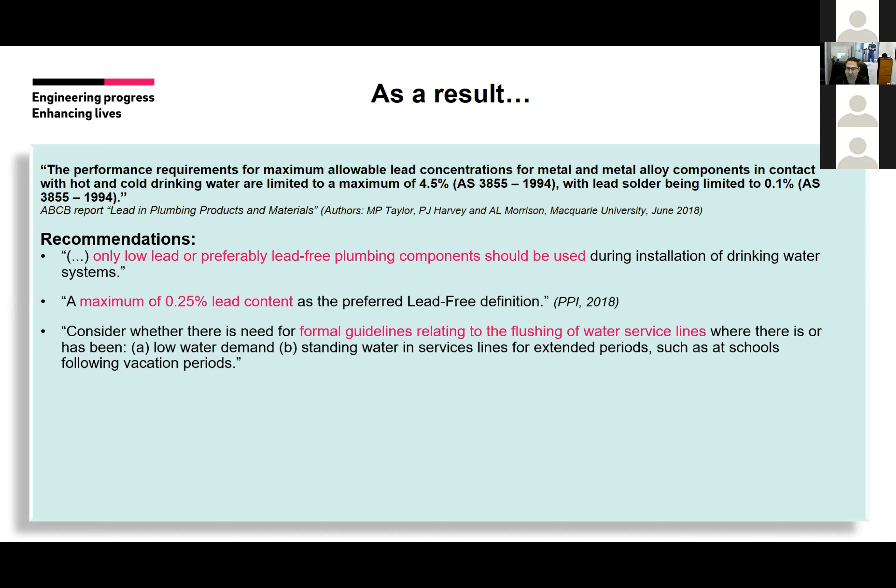It's our understanding that the ABCB will implement requirements on maximum lead levels for drinking water plumbing components in the NCC 2022. The last NCC update was 2019, and the next will be 2025. But we see the requirements now - some hydraulic consultants and healthcare professionals have started putting them in their specifications. In Victoria, the VBA with their schools programs are specifying lead-free pipework from now. As a result, REHAU has decided to offer a lead-free water solution in 2020.

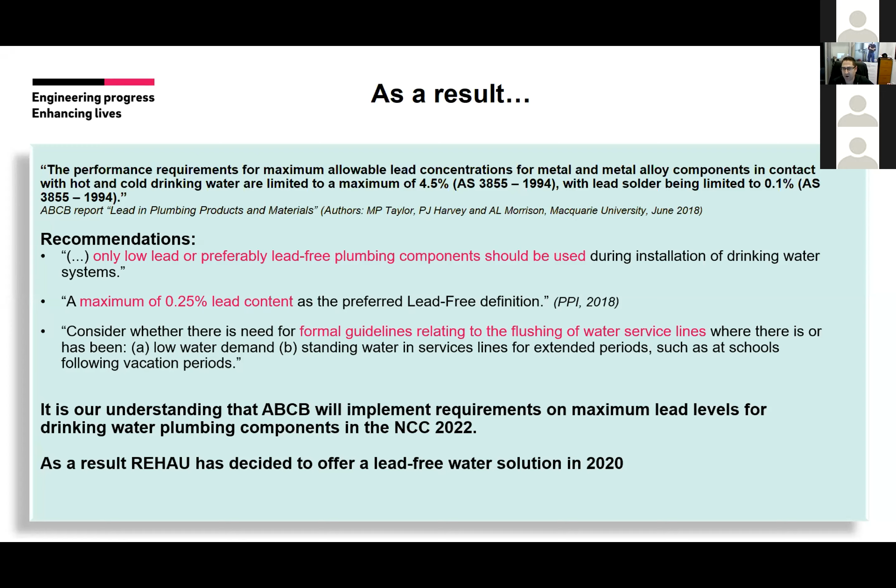To go into more detail: REHAU's proposition is a trusted and affordable lead-free gunmetal piping system that delivers clean and safe drinking water to the community. Lead-free REHAU RAUTITAN is the name, with 53 lead articles made of gunmetal and 11 polymer fittings part of the range.

To give you an idea - the lead-free gunmetal REHAU solution is copper, zinc, and tin. Previously our normal REHAU RAUTITAN was made of copper, zinc, and lead. We've taken the lead content out and inputted zinc and tin (SN), bringing the system to 0.1% lead with proven corrosion resistance.

This system has been used in Europe for many years already - those standards changed there some time ago. As we all know, Australia is generally walking a little bit behind, and having companies like REHAU, a German company, we've got access to that a lot sooner. So we're looking to bring that to Australia sooner as well.

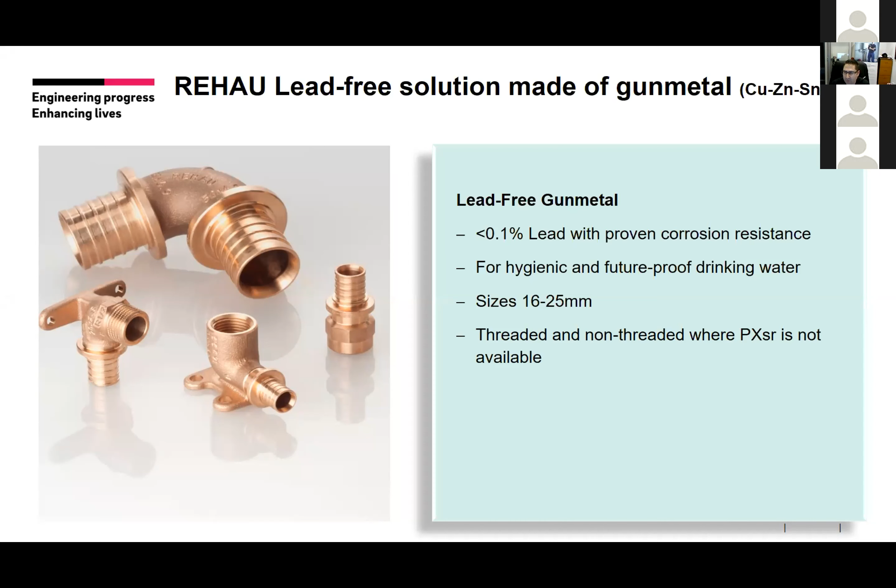Gunmetal as an alloy for this system is available in 16 to 25 mil, in threaded and non-threaded, where the PXSR is not available. The PXSR is our polymer range, which we'll go into here.

The PXSR fittings - you'll notice the SR attached to the PX portion of our communication now - meaning solvent resistant. In the past there were liquid thread sealants and harmful chemicals that could affect polymers. REHAU would prefer to be risk-free, and I would prefer to be risk-free for the market, so we've brought a new polymer fitting into the marketplace called PXSR, safe for the community and safe for the project.

These fittings are 0% lead for hygienic and future-proof drinking water, and 100% corrosion-proof. The sizes are 16 to 20 millimeters. Only polymer fittings come as non-threaded, and as stated earlier, they are solvent resistant.

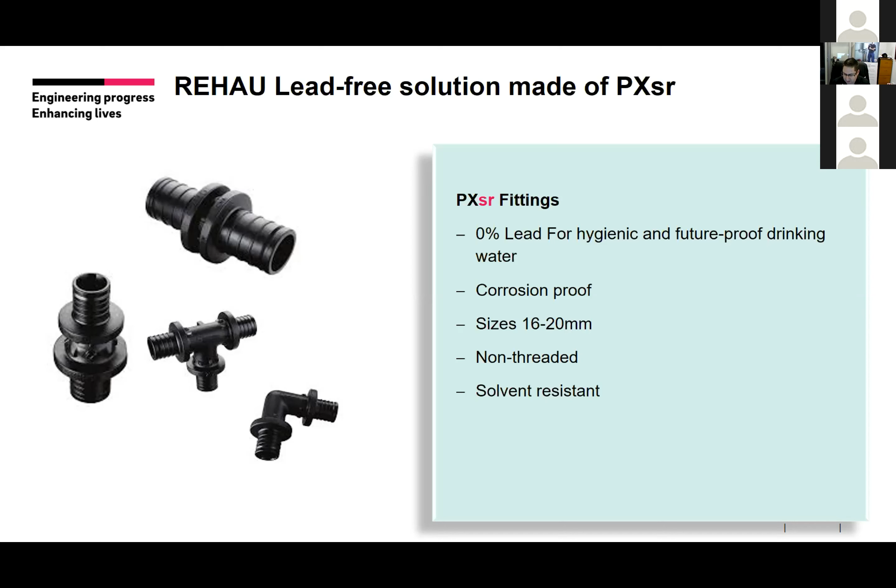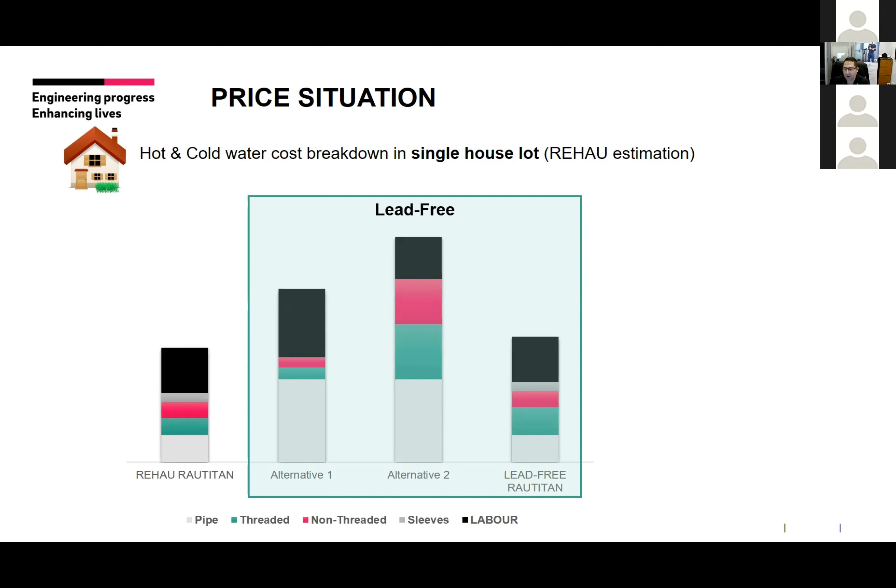But then you look at where lead-free RAUTITAN sits. So the key message here is the only thing that increases from your current REHAU range for a project is the threaded fittings. Our pipe doesn't change, our labour doesn't change, our non-threaded fittings don't change due to them being polymer. The only thing that will change is the threaded fittings.

So there is a significant saving from our lead-free RAUTITAN compared to alternatives currently available. But you can also see, if you can see my screen here, the increase from the black line to our current RAUTITAN is limited.

To get further details on those and costs, I can do a one-on-one, send me an email, and we can communicate some further costs to you, because we like to do that in line with the contractor, so they can work with you on their costs as well.

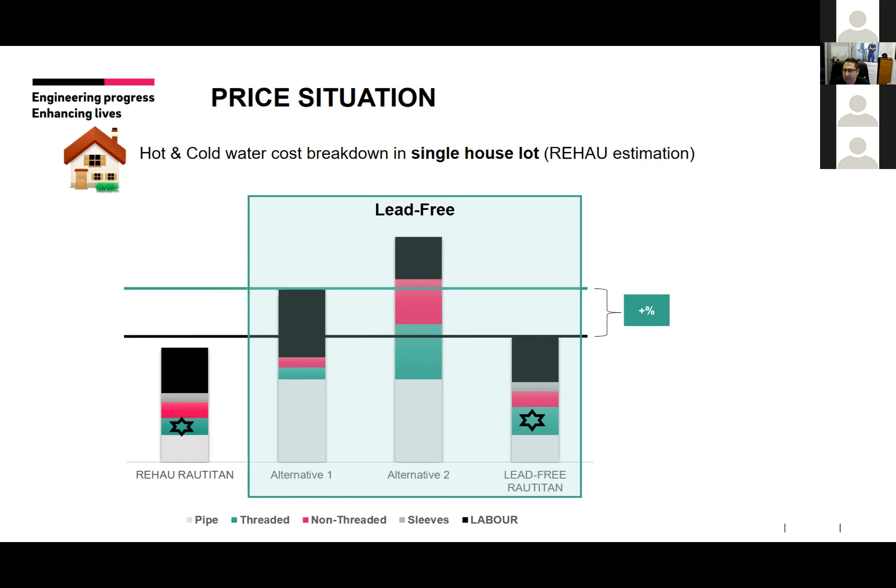So the range for 2020 is obviously our pipe is 0% lead, our fittings PXSR are 0% lead, our RAUTITAN gunmetal fittings is 0.1% lead, and our sleeves are 0% lead as well.

So to break this all down, if you are looking for safe drinking water, peace of mind, and an affordable price, lead-free RAUTITAN is the solution. We've been a trusted manufacturer in the industry for so long with our compression sleeve technology and our backup. So for REHAU, we would definitely love to see this system being used in projects in the future.

There is a poll going through as well. We will conduct training on site, and we conduct training sessions for the hydraulic engineers as well, so we do have that availability.

One slide I didn't put in here was myREHAU.com. So if you write that down, myREHAU.com, that's our training platform, but also where all your downloads are live 24/7. So as soon as there's an update on anything REHAU, it all goes on myREHAU.com.

So, appreciate it if the hydraulic engineers out there fill in that poll. We're getting a lot of inquiries now. Stock is becoming available in the coming months, and we're looking forward to working with everyone with lead-free in the future. So Nick, I'll now hand over to Christoph.

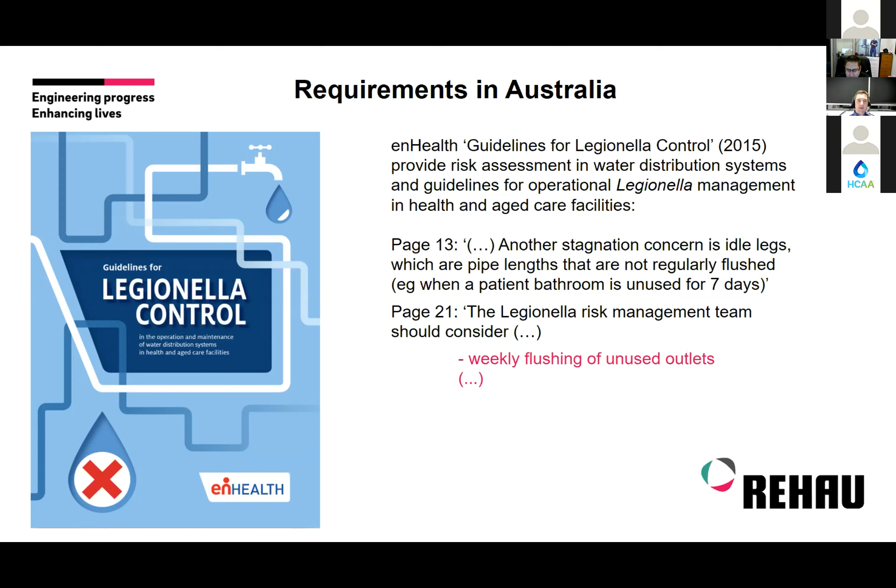On page 21, they recommend that the Legionella risk management team should consider in their operational routine a weekly flushing of unused outlets. Now, this is quite onerous to ask. And if you look outside health and aged care facilities, avoiding idle legs - how is that possible, or where else can that occur?

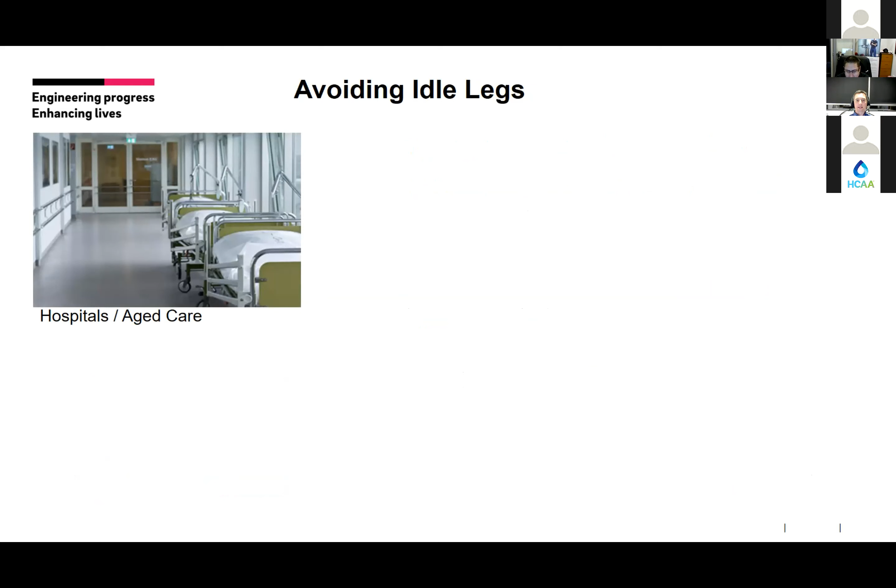We've just seen hospitals and aged care - yes, you can have patient bathrooms unused for more than 7 days. But look at the current situation with hotels and apartments - they're also unused for longer periods. Look at sports halls when they're unused for longer periods.

Or an emergency shower - emergency showers aren't intended to be used regularly, so this is definitely an idle leg sitting there that should be flushed every 7 days if you follow these guidelines and apply them to this application. Or also in schools during vacation periods.

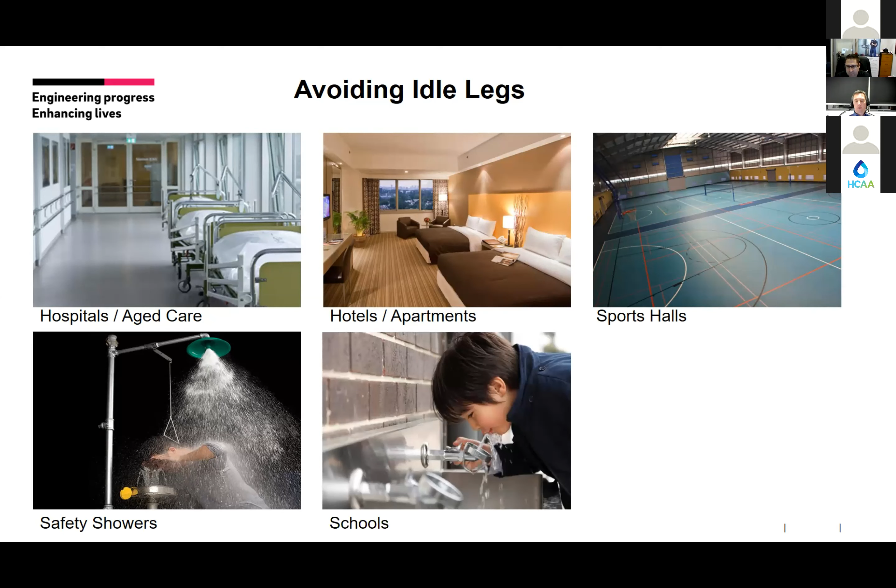So the question is, for a designer, how can we design better systems that remove this requirement for the operator to flush these systems every 7 days? Are there options out there to make it really simple? With our new fittings, we are now providing this solution as part of our lead-free range, and I'd like to show you some examples of how these fittings work.

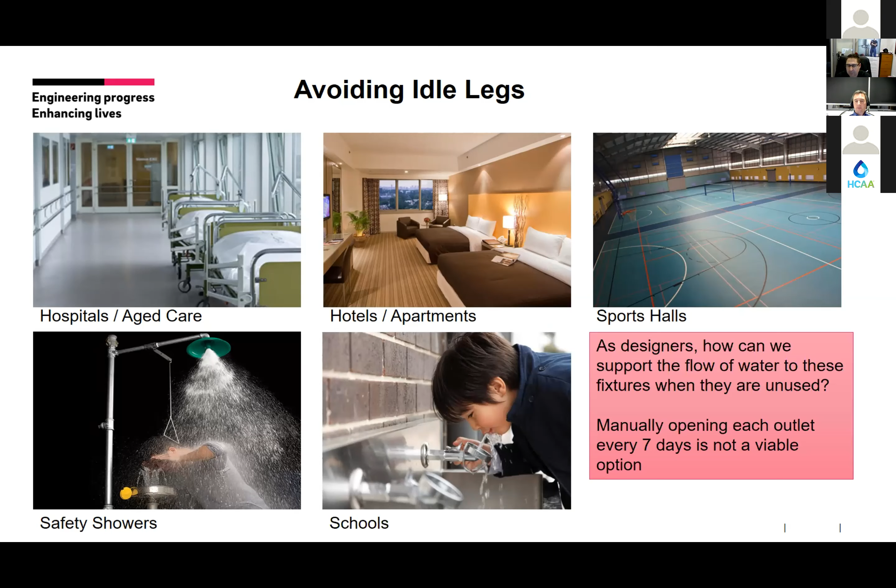To start, I'd like to explain how our most commonly used T-piece installation works. The T-piece installation has branches to every outlet, and when you use these fixtures at the outlets, you get water flow. I'd like to show you a short video of how this looks. Hope that works now.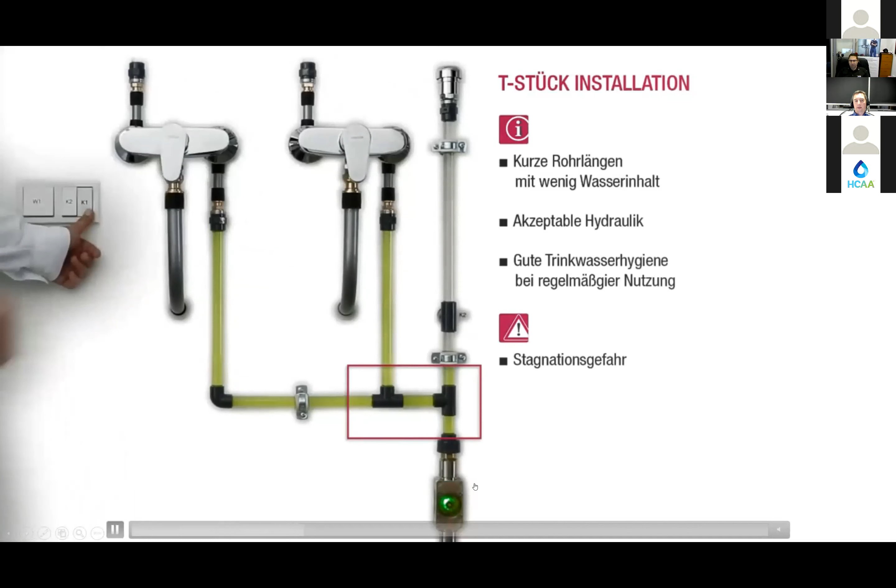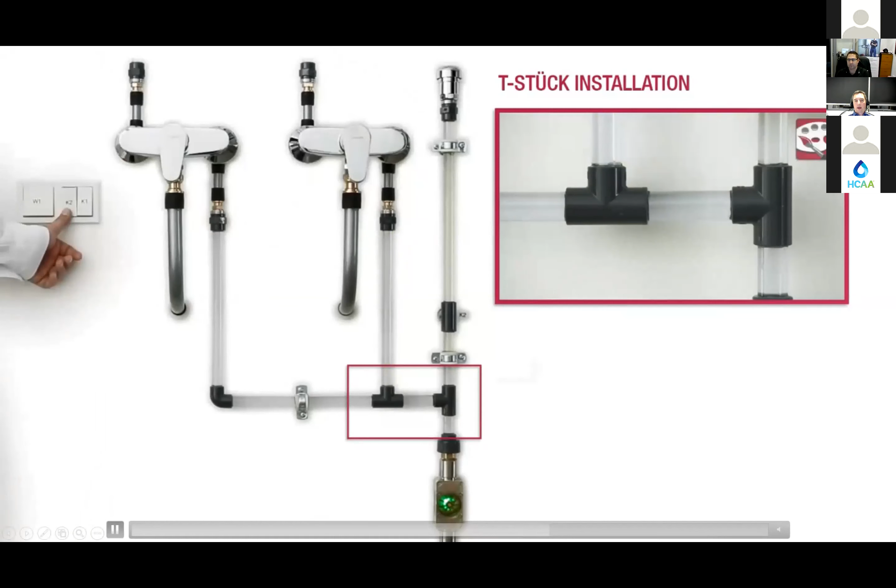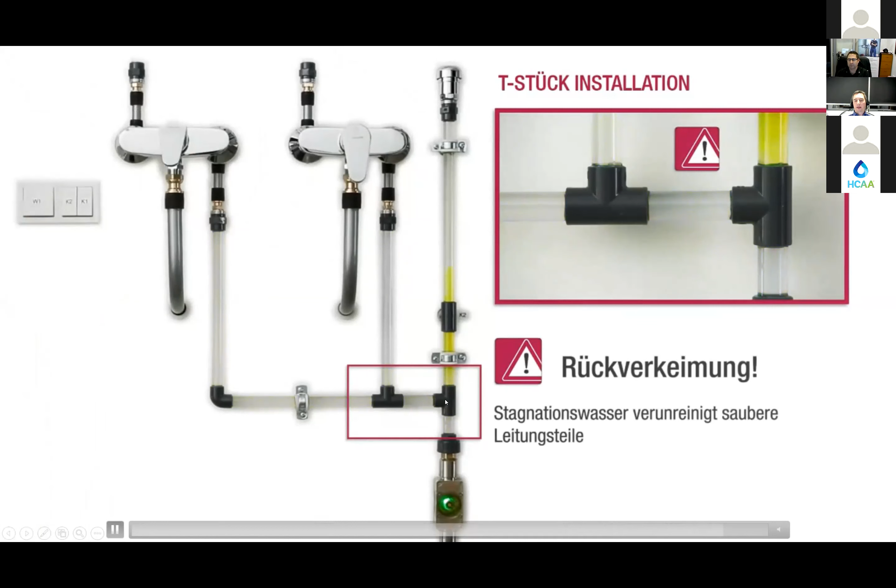Now as a second explanation, this is a dead leg, a proper dead leg, so there's no fixture at the end. They use a different button to color that water. What can be seen here is if you have these dead legs and a source of bacteria, opening a perfectly fine section of pipe can actually be contaminated repeatedly with bacteria when you open this fixture. This is why dead legs and idle legs should be avoided.

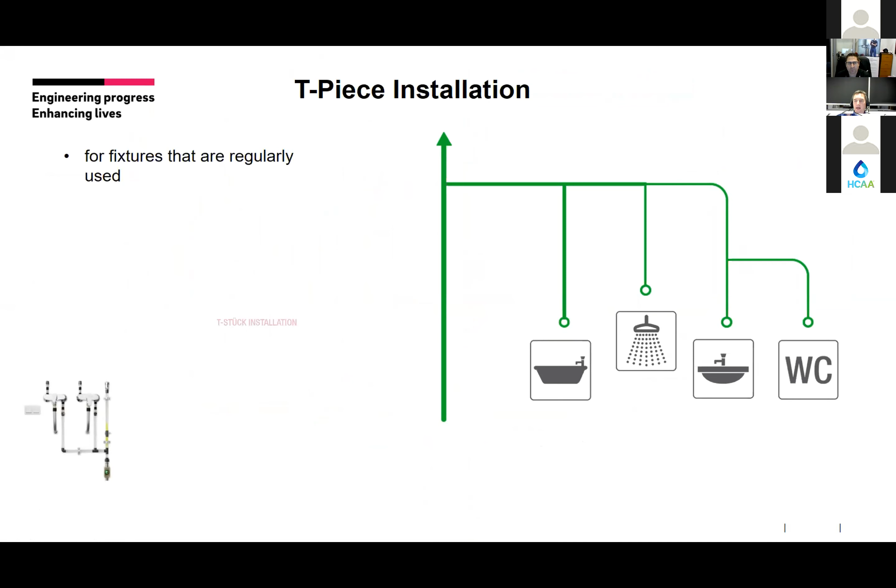It's a very good explanation here in this T-piece video. The question is now, how can this be done best? The target is quite simple: just reduce the length of the branch line.

Hang on, what's now? Nick, have I done something? Can you please? Sorry for that.

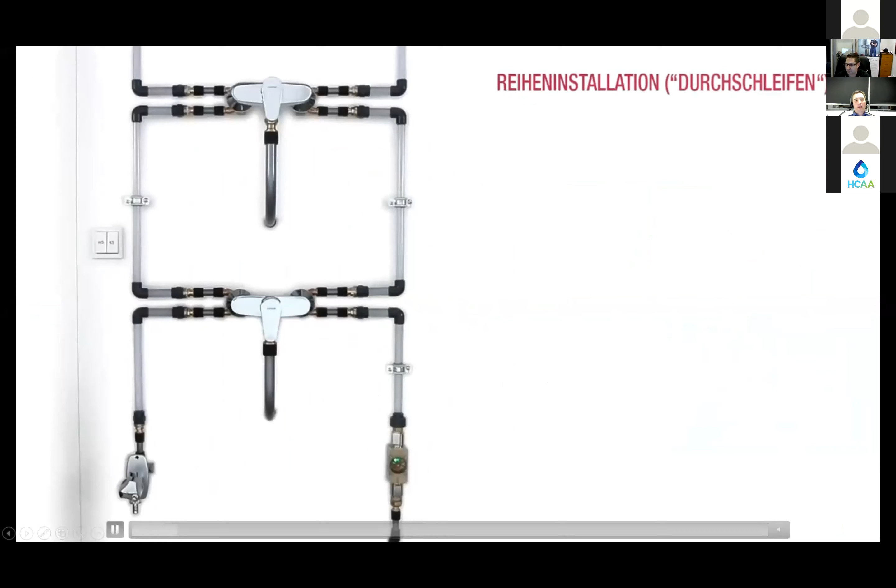Right, so this is the video. In this case, this is the installation with that special fitting behind here and here. We open this fixture to let the water flow out, and the colored water now comes from the top side, so we color all the water in.

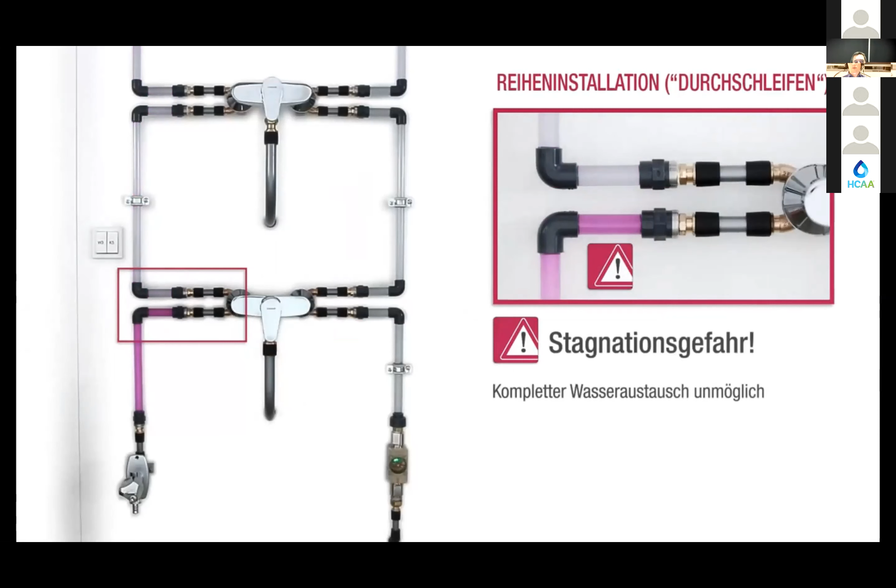When we now look at this section, again the clear pipe, and we open one of these fixtures, which will happen in a second in this video - so they open this fixture now - you can see that all the pipeline upstream of that fixture is flushed through. So this fitting, the use of that fixture, will actually flush through everything that is upstream of the fixture due to the installation in series.

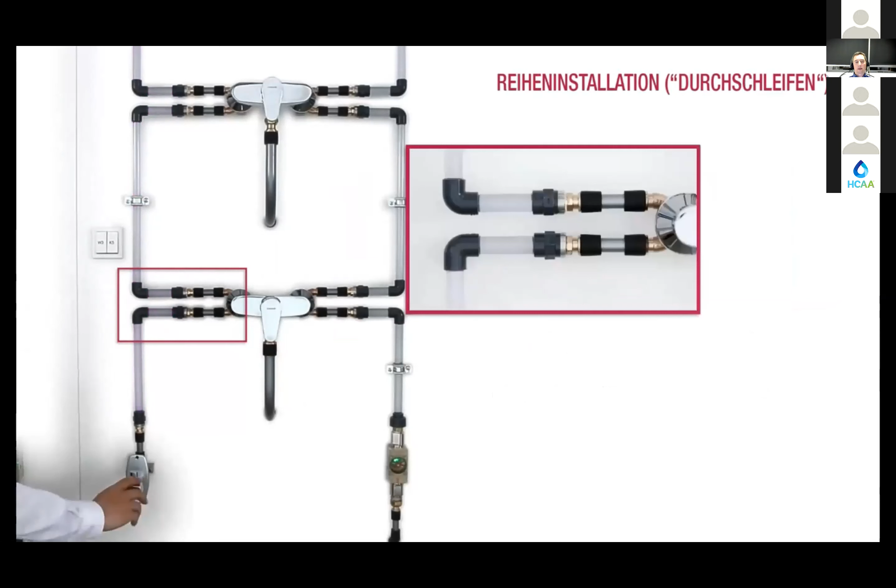If you flush the last fixture, then you flush the whole installation at once, and you actually avoid idle legs to all fixtures. This is only required for fixtures that are really not used regularly - here in this case we have a combination of fixtures deemed to be used not regularly, like this one and this one. They are installed in series. Then we have two fixtures like this one and this one, deemed to be used more often as per the operational schedule that you've received, and they are installed only as T-piece installation.

But this can be changed depending on the project, and you actually save even a few fittings, because out of two fittings you just make one. To make it even easier, if you don't have any fixture that is used by the user, one of these fixtures, the last one, could be an automatic fixture, like an automatic tap in a hotel room. That can be used as the last fixture, switched to flush once a week for example, and that would flush the whole line in this hotel room.